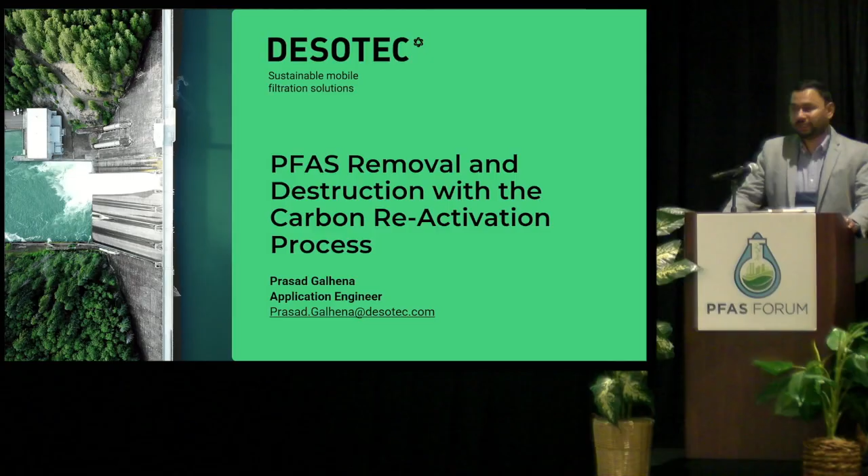My name is Prasad Galhena, and I'm with DESOTEC, and we are the largest activated carbon mobile filtration company in the world. We've been in the industry for 30 years, and I'm the applications engineer working with our commercial team.

So today's goal is to give you a clear understanding, because everybody talks about activated carbon adsorption, resins, and all these technologies. But as you know, this is a phase separation. You have something in air or liquid phase, and you got to take it out. So you use activated carbon, and then nobody talks about destruction. So it's a phase separation, and it's still on the carbon pore structure. So now you have a problem with disposal of activated carbon. So that's what I thought.

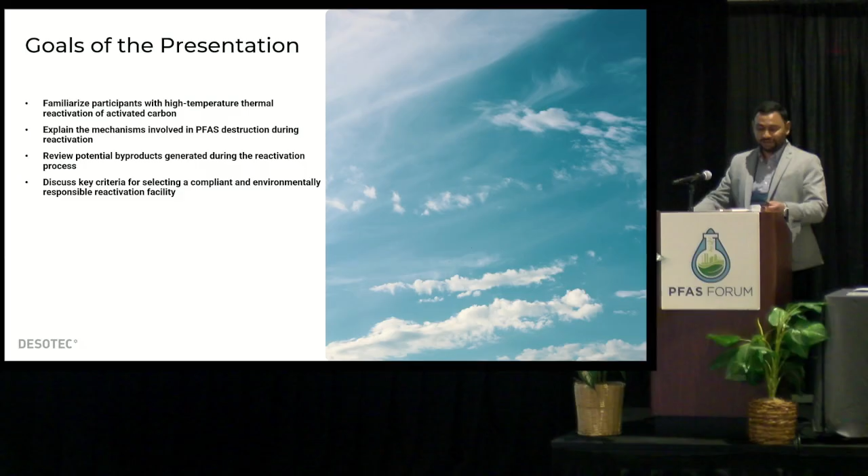I'm going to discuss destruction of activated carbon after remediation treatment. My goal is to give you a clear understanding of high temperature thermal destruction of PFAS, plus the byproducts produced in this process, and also to evaluate, because not every single reactivation facility is EPA compliant. So I'm going to discuss how to evaluate and find the right facility so you can safely dispose of activated carbon.

This is the process: you have saturated carbon, and then it's off-site disposal in a reactivation facility. During this process, during the reactivation process, there's going to be off gas, flue gas, gas emissions, and flue gas salts. Plus reactivated carbon free of PFAS, ready for reuse.

A 1-minute crash course on how activated carbon works. When it comes to PFAS, you can use coal, wood, and coconut shell. These are the three primary raw materials used for manufacturing activated carbon. Coconut shell has a really high micropore structure, ideal for ultra short chain PFAS compounds and VOCs. Whereas coal based and wood based have a combination of meso and macropores, ideal for long chain PFAS compounds.

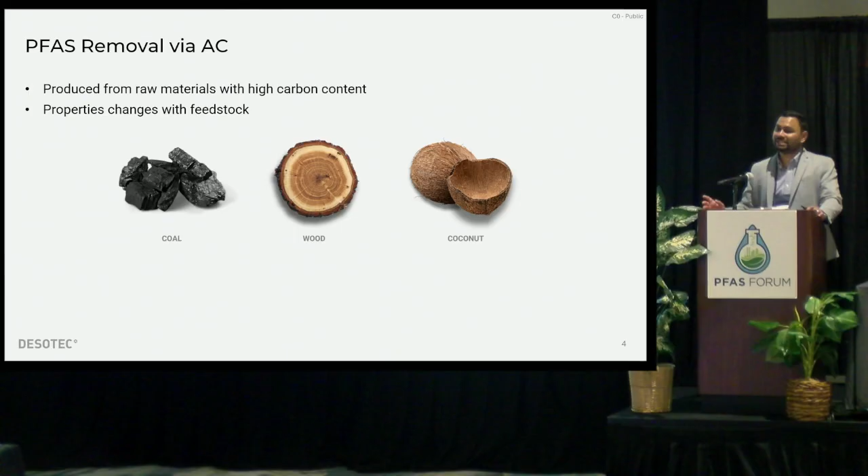Depending on the raw material type and the activated carbon type, the adsorption efficiency varies. So you need to be careful when selecting the right activated carbon type. Not everything is the same.

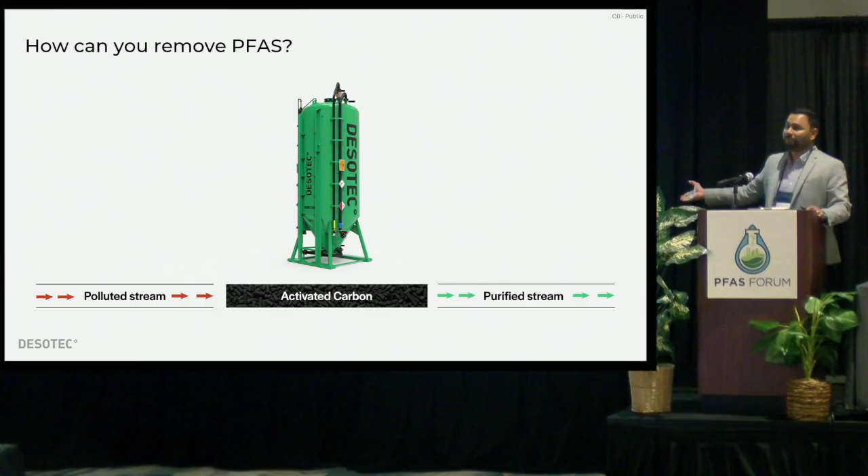This is how the process works. You have the polluted stream, the liquid wastewater or drinking water stream, and then you have the filter filled with activated carbon. The liquid goes through the activated carbon filter, all these PFAS and pollutants get loaded onto the pore structure, and you have a purified stream. That's the basic principle.

PFAS can be completely removed using activated carbon, down to almost non-detect levels, less than 4 parts per trillion. Yes, you can use activated carbon to remove it, as I explained with the micropores, mesopores, and macropores.

So that's the mechanism. The lifetime of the activated carbon filter depends on the type of PFAS and concentration, because activated carbon cannot handle really high concentrations. So you need to check, like most activated carbon manufacturers and suppliers have mathematical models. You can use isotherms and pilot testing to find out if this is feasible.

Then there's presence and concentration of other organic and inorganic matter, like especially TOCs in water. It could be drinking water, like in groundwater, TCE, PCE. Those compounds can compete against PFAS to get into the pore structure. And the type of activated carbon, as I explained, the contact time, and discharge limits matter. Discharge limits, POTW or surface water limits, you need to be careful with that. The contact time is really important.

If you don't provide enough contact time, there's going to be issues and early breakthrough of the filter. So for PFAS, when I design systems, I provide at least 15 minutes of contact time. And if it's industrial wastewater, such as oil and gas systems, chemical plants, or stormwater runoff, I design with 30 minutes to 1 hour contact time.

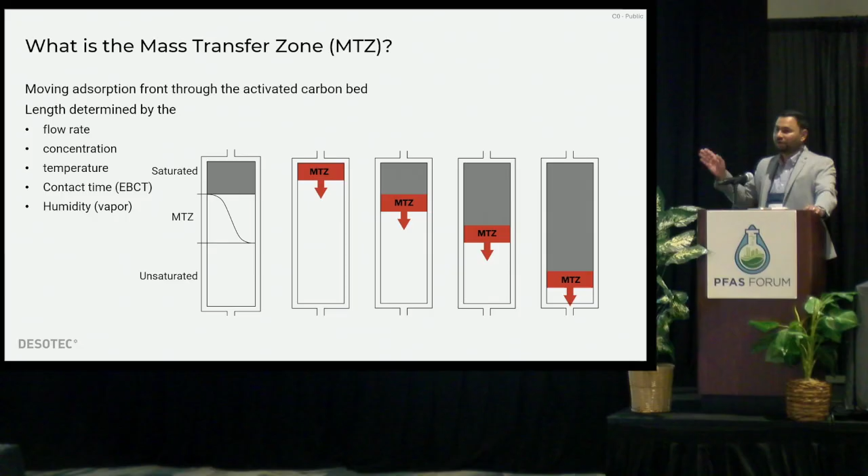Most engineers I've seen think they just need 2 filters with 2,000 pounds of carbon, or 10,000 pounds of carbon. But it's not just activated carbon - you need to design the filter properly with enough contact time in order for adsorption to work. So keep that in mind.

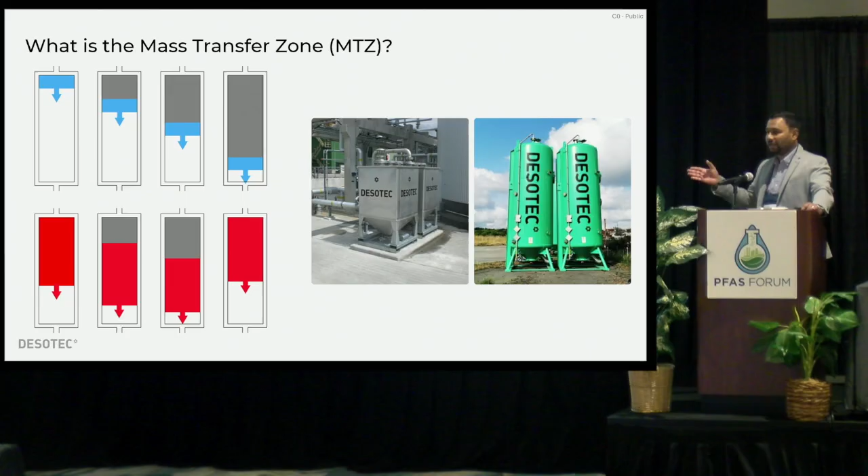This is a comparison of 2 mass transfer zones. The blue one is short and sharp and very efficient, and it moves through the bed which is designed properly, with no channeling or anything. The red one is broader, a larger mass transfer zone, because there isn't enough contact time or enough flow rate, or something like that. This shows that it's not just activated carbon - it's about engineering the system as well.

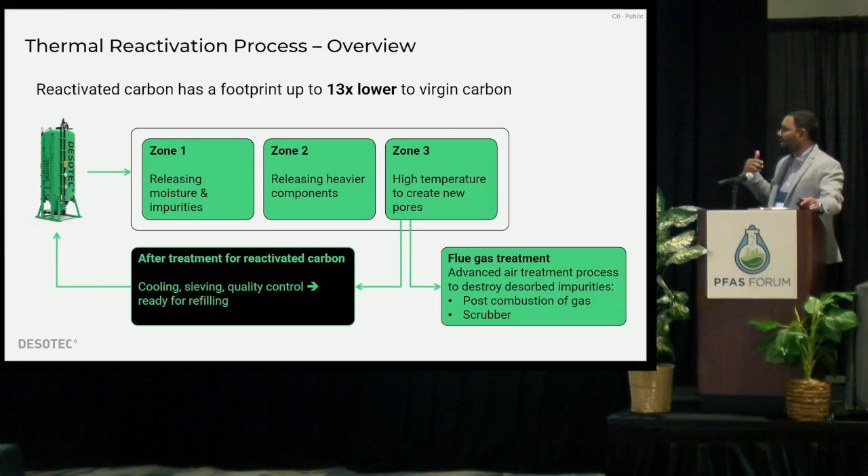The most important thing is reactivated carbon has a footprint up to 13 times lower than virgin carbon. So the customer doesn't have to use virgin carbon every single time. They can reactivate and save some money on carbon filling.

So the recycling, this is how it works. First, at 120 degrees Celsius, drying the saturated activated carbon and volatilizing low boiling point components, around 450 degrees Celsius. Pyrolysis of other organic components up to 600 degrees Celsius, it could be PFAS and things like that. Then steam injection for oxidation up to 950.

When it comes to steam injection, it not only oxidizes certain molecules inside the activated carbon pore structure, it also creates certain new pores. So there's not going to be a big difference between properly reactivated carbon versus virgin carbon. This is why the heat profile is very important.

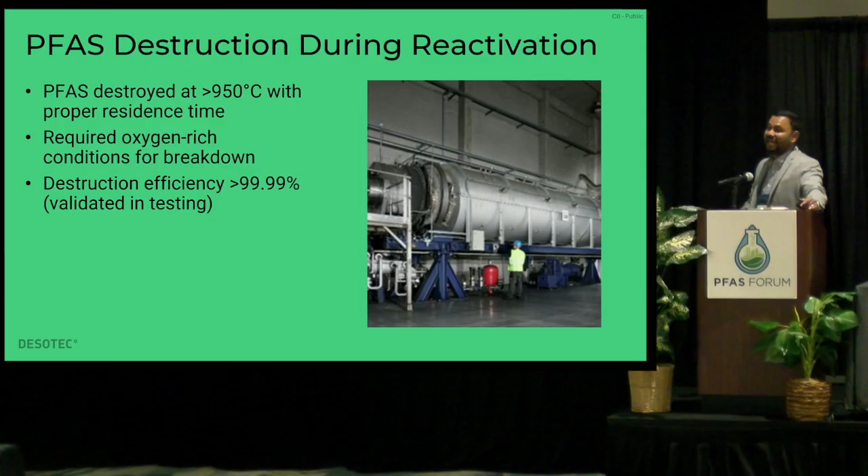The destruction efficiency is the most important thing. It could be more than 99.99% with validated stack testing and destruction testing.

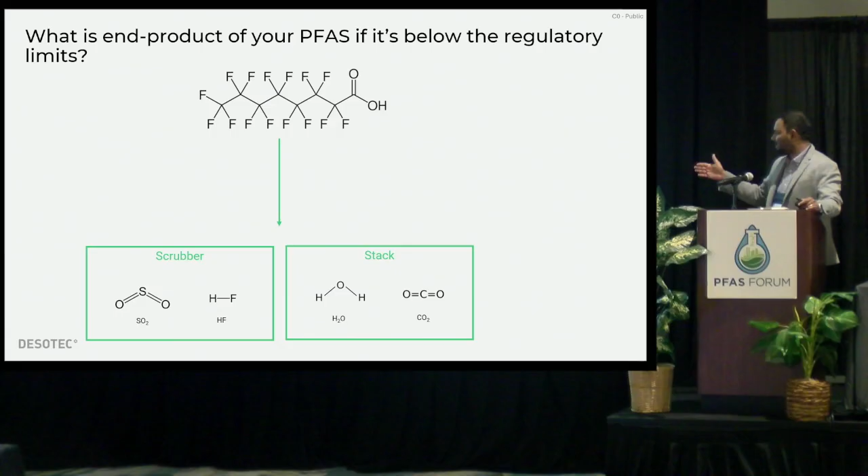The byproducts during reactivation: as I explained, the PFAS is desorbed and then completely destroyed, and that creates, inside the post-treatment flue gas, the scrubber system produces HF and SO2. The scrubber system handles this by injecting sodium hydroxide and caustic to neutralize completely, and then in the stack, there's only H2O and CO2. That's pretty much it.

Emission control and byproducts again, for flue gas treatment you can use thermal oxidizers, and acid gas scrubbers are used. Byproducts include HF, CO2, H2O, and trace inert ash. Laboratory analysis is important because you have to do stack testing and test any trace inert ash or residues to make sure those are free of PFAS.

The reactivated carbon is another important factor. Once the carbon is reactivated, you need to make sure it's free of PFAS residues. You can send samples out, or in-house laboratories can run this to make sure it's free of PFAS.

Selecting a reactivation facility, it's important to read the interim guide on PFAS spent carbon reactivation. Number one, ensure permits to handle PFAS-laden spent activated carbon, whether this is a permitted facility, a RCRA facility, and things like that. I've seen many things in the industry over the last 15, 16 years, where a supplier says they can run PFAS, but actually they're running around 1,100 to 1,200 Fahrenheit, so these PFAS are just releasing into the environment, mainly because there is no permit for that kiln facility.

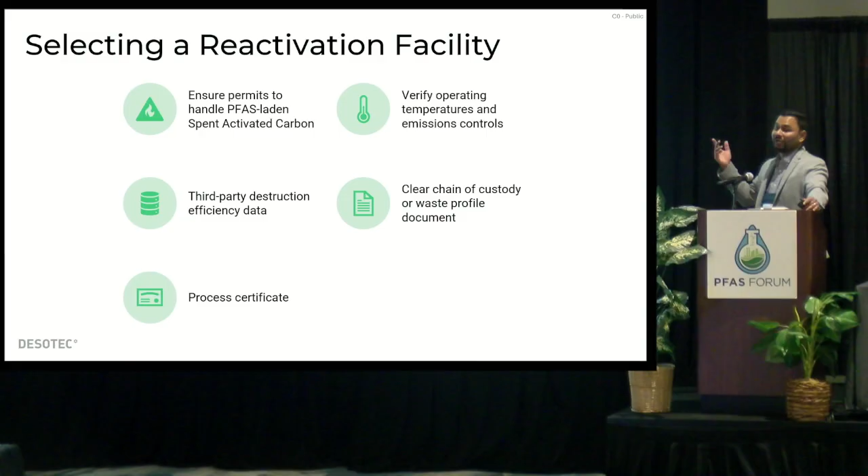You can do a site walk, go to the facility and make sure you do an audit of that facility for reactivation. And there should be a clear chain of custody and waste profile document, since you're transferring your waste into another facility.

Life cycle benefits of reactivated carbon: it reduces demand for virgin activated carbon. As you know, over the last few years there was really high demand for virgin carbon, and prices are going high, especially due to tariffs, especially carbon coming from other countries getting 30%, 40% tariffs.

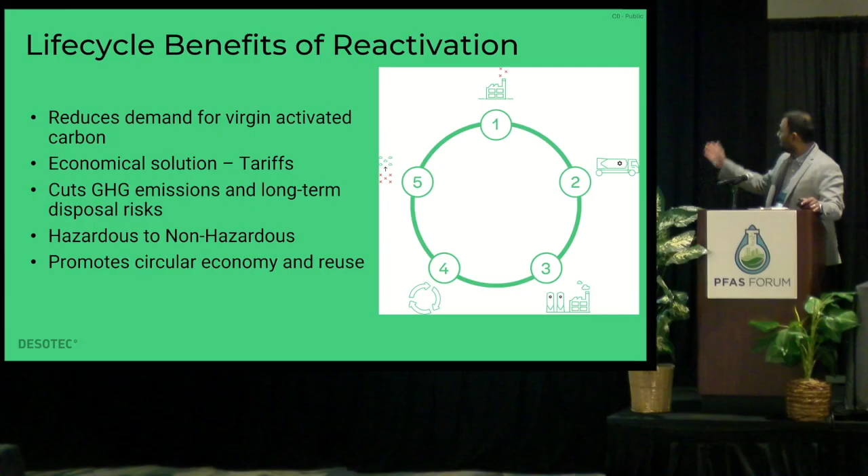And it cuts greenhouse gas emissions and long-term disposal risk. Each time you reactivate, you don't have to send it to a landfill, and you can completely destroy all the PFAS and use that carbon back. Hazardous to non-hazardous - so hazardous carbon filled with TCE, PCE, PFAS, and turn that into a non-hazardous compound that you can reuse. Especially at DESOTEC, we call it circular economy - you use it again and again, at least 5-6 times before it's completely exhausted.

Limitations and considerations: not all spent carbon is suitable for reactivation because facilities might have restrictions, especially the scrubber system or caustic pump, and it could be the maximum PFAS limit. So before you send out your activated carbon laden with PFAS, make sure the facility can handle that. There has to be documentation, a permit, or destruction data showing the maximum PFAS level that we can handle.

Short chain PFAS may require enhanced controls. We have different types of activated carbon for that - for short chain and ultra short chain compounds, you can use coconut shell. When I design systems, I use maybe 2 or 3 carbon types, maybe 2 different stages, to remove TOCs and short chain PFAS, and then long chain.

Reactivated carbon must be tested post process - of course it requires lab analysis to make sure it's free of PFAS. There's a limited number of reactivation facilities in the US, so the logistics can be kind of complicated, so you need to make sure you cover that.

I think that's it - this is DESOTEC. Thank you so much, appreciate it.

So next, we will bring up Phil Farina from Clear Creek Systems, and he's going to talk about PFAS treatment for rural water treatment systems. And I want those extra 3 minutes. Nope, we're not going to give them to you.

Good morning, everyone. My name is Phil Farina, and I'm with Clear Creek Systems. The first thing I want to do is ask a question: how many people here either represent a rural water community or work with a rural water community that has a PFAS problem? Throw your hands up.

So I got one member of the audience. Who cares? Okay, that's good. We all can.

What I'm going to be talking about today is a roadmap for rural communities. At the end of the day, we're going to try to provide practical guidance - a roadmap. These are things that a rural community can do step by step. There's a lot of noise in this industry, a lot of smoke and mirrors, and a lot of fact, but it's very difficult sometimes to separate fact from fiction. So our goal is to help you understand by following a specific series of steps from beginning to end, giving you all the things you need to do in order to develop a treatment system, because that's the ultimate goal - the development of a treatment system.

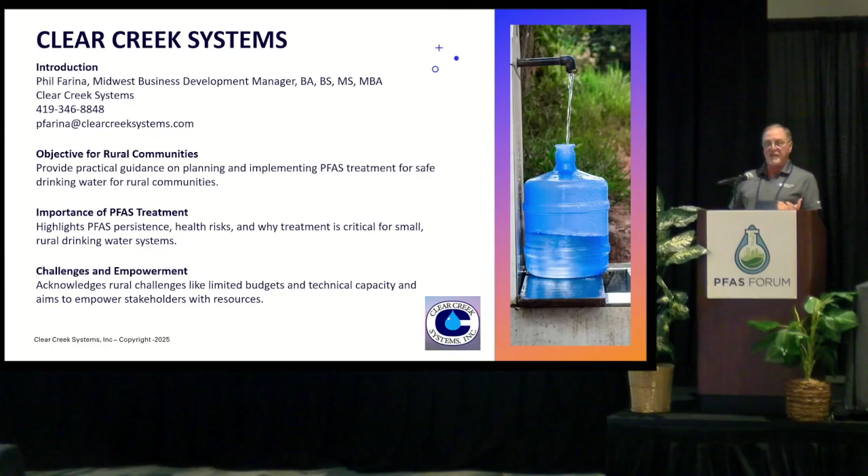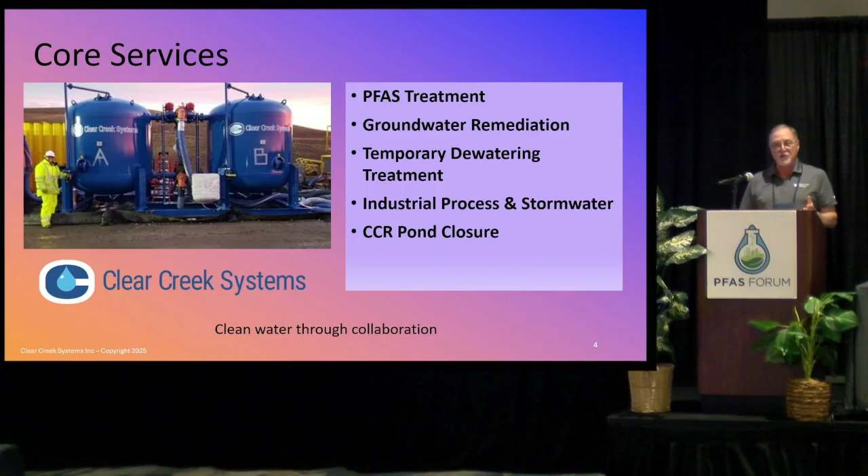And then we're going to talk a little bit about the challenges facing smaller rural communities. So we're going to go from contamination to cleanup and provide a course to get from point A to point B. Paid commercial announcement: Clear Creek Systems is a PFAS treatment technology agnostic company. We treat all kinds of water, and we've utilized 35 years of experience in developing water treatment technology that allows us to bring this concept to the table. This is not something we developed in the last 2 years - we've been utilizing all of our knowledge and technology to help develop this roadmap to treatment.

So, per and polyfluoroalkyl substances - our best friend, PFAS. We all know it's the forever chemical, and there's a lot of disputes about what that really means. At the end of the day, it means the following: most things break down in the environment.

PFAS doesn't break down because of the quality of the carbon-fluorine bond. That bond is non-naturally occurring, and because of that it's incredibly strong. Microbiology cannot break it down because it costs too much energy, as if you were eating celery for the rest of your life - the nutritional value isn't sufficient for microbes to survive, so they prefer other carbon sources. It's as simple as that. I'm a microbiologist by training, and believe me, I wish my little babies could do it. They can't.

It is toxic. What does toxic mean? Toxic means it has an impact on the biological system itself. It does not mean it causes cancer. There is not a single peer-reviewed journal entry that indicates that PFAS in any of its forms causes anything. There are correlations, but not causation, and that is incredibly important to understand.

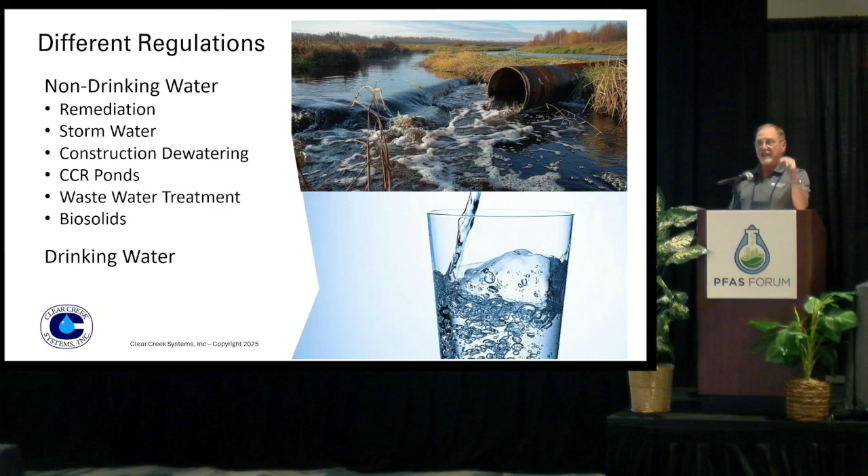9 states in the United States have eliminated the utilization of biosolids as a land application product because of PFAS in it. We're building mountains of biosolids.

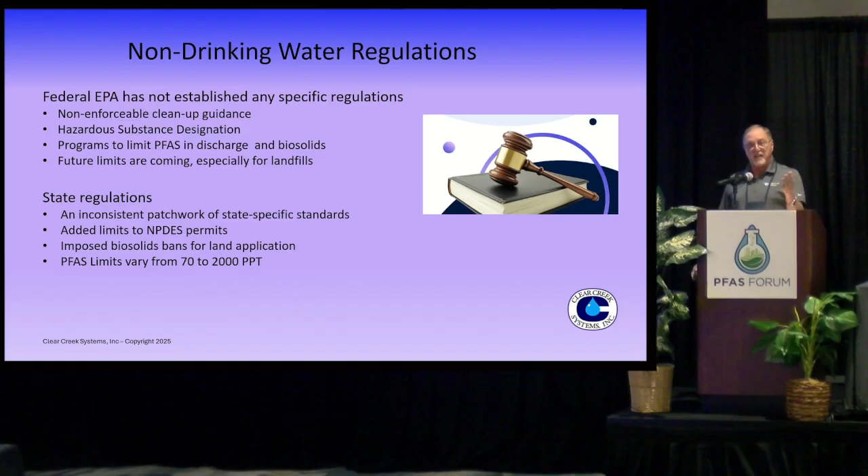Non-drinking water regulations, they have not established anything. The states have primacy on that, so they're working down that path by the state. Some states have levels of like 70 parts per trillion for non-drinking water. Some states have levels of 2,000. So if you are in a state that you're working on a wastewater treatment facility, please contact your state regulator and find out what their specific regulation is.

What's next? The US EPA is going after landfills, POTWs, pulp and paper. All that wonderful shiny paper in front of you, that's got PFAS in it. All the inks that you're dealing with, that's got PFAS in it. PFAS is going to be added to new air permits. We're not having enough trouble handling it in water. Let's just really complicate it and start handling it in air.

It is not a hazardous waste. It is a hazardous substance. That's hugely different, and again, I can spend hours telling you the differential between that. And some of these Superfund sites, those poor guys that got their nice little closure document, may have to reopen it if they're leaking PFAS out of that facility.

Federal drinking water standards. Everyone's read this: 284 pages, April the 10th. Everyone read it? Yeah, I did. The standards are PFAS at 4 parts per trillion for PFOA, PFOS. You have the 10 parts per trillion for Gen X and all of these others, and the compliance deadline of 2029. I have had people come up to me on a number of occasions and say the compliance deadline is not 2029, it's 2031. How many believe it's 2031?

Excellent. January 6, 2026, the U.S. federal courts threw out the request for vacate. The reason they threw out the request for vacate is predominantly because in order to change the law, it's a legislative change, not a judiciary change, and because of that, the EPA backed off. It is 2029 that we need to be in compliance with these drinking water standards.

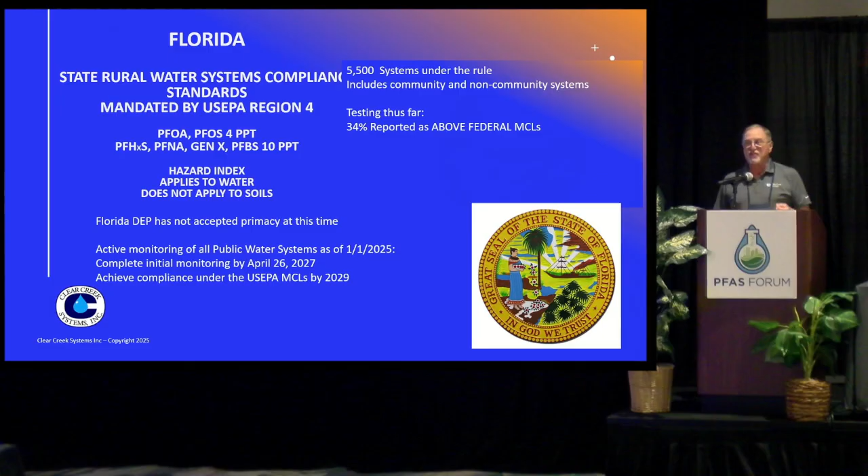Rural site challenges. One of the things about rural facilities is they tend to be small, so you don't have a lot of people to deal with, and you don't have a lot of revenue coming in on the water stream. So revenue is a big factor for rural communities. Large municipalities have large numbers of people. They can charge 2 pennies or a penny to treat, and they have lots of revenue coming in. If you've got 2,500 people, you can't raise the price enough to cover it. So that's one of the important factors: very small populations and very limited staff. Most of these smaller facilities have 1 or 2 guys, and some of them are not even operators. They're just Joe Farmer who comes in on Tuesday and checks the system.

So compliance is going to be stepwise at that point. Aging infrastructure: a lot of these small facilities we see are old. They're basically a well in the ground, a pump, maybe a filtration system - 99% of the time no - and sometimes a disinfection system. That's it. That's the whole thing these small rural communities are dealing with at this point in time. Most of their source water is groundwater. Groundwater is different from surface water when it comes to contaminants and treatment, and it's really important to understand, when we get to the map, the difference between groundwater and surface water.

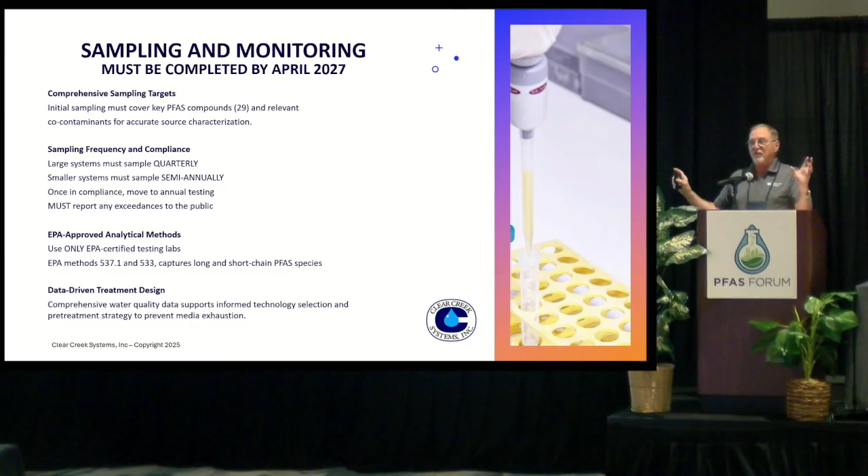EPA approved analytical methods. There's lots of methods out there coming. There's one that can tell you down to 1.5 parts per trillion for $100 in 15 minutes. But right now, today, where we sit, US EPA methods are 537.1 and 533. That's for drinking water, that's what you need to be utilizing. 1633 is for something completely different, it's not for drinking water.

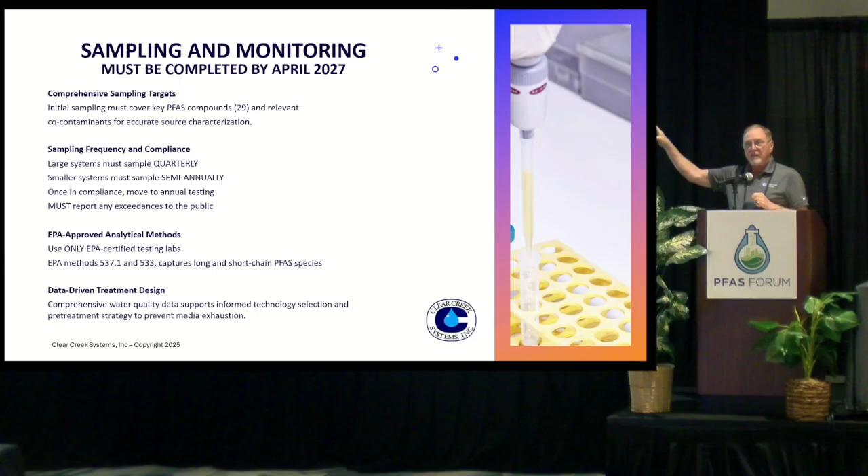Make sure that you are utilizing a certified testing lab. It's very important that the labs are certified. This is the analytical that you need to perform. At a very minimum, all of those under the UCMR 5 have to be tested for.

And lithium. Why lithium? Because we're throwing away a boatload of batteries. What do you think the EPA wants to know about lithium in batteries for? It's because down the road, what do you think the next thing they're going to be regulating is? It's lithium. So you need to know that going in.

You also need to know all of these other things. When I show you the rest of the map, you'll understand that all of these things may impact your water treatment technology. If you have high nitrates, sulfates, or TSS, it's going to impact your treatment choice. So what are those treatment technologies?

Right now there are 2 major classes of treatment technologies: media systems and non-media systems. Media systems include our friend granular activated carbon. I am a firm believer in bituminous, virgin carbon. It has the best application for PFAS, it has the right pore size, etc. You can use coconut carbon too, it may not last as long, and you may not get the same net result, but at the end of the day that is one of the materials to look at.

The other option is ion exchange. Ion exchange has a different mechanism. It's much faster, you may use less media. It can be a few dollars more expensive, but over the life of the system it may be less costly.

When you're calculating how much this is going to cost, do not look at the instantaneous cost, but look at the 3-year total cost. I'll show you the math in a minute. What you're going to do is look at the total cost, divide that into the number of gallons of water that you treated over those 3 years, and you will get a price per gallon. That is a critical value that you need to know.

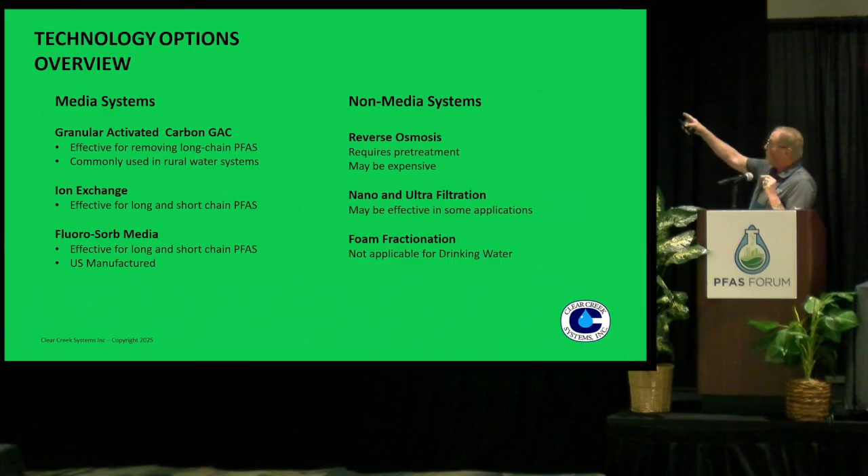Fluoro-Sorb is another media application. For non-media, we have reverse osmosis. We all know the problem with reverse osmosis: it takes all the salt out of the water, it changes the taste dramatically, you have to put salts back in to make the water taste right, and you lose 25% of your water. Not a real great plan for drinking water, but it can be accomplished.

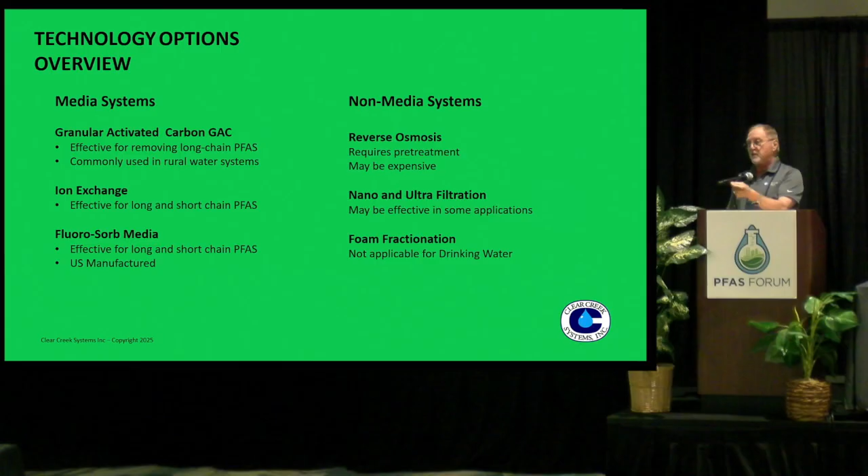Nano and ultrafiltration, Florida loves this. It's a really good technology, it does work really well. And then foam fractionation, which is not compliant for drinking water, so I put that up there for anybody who's got a landfill or wastewater treatment facility. Foam fractionation may be something that you can do.

Treatment technologies: when you're looking at your system, before you design your treatment technology, you want to have that information I just told you about when it comes to the analytical. It's really important to have that analytical before you start looking at treatment technologies. So you want to know what your PFAS profile is. What do I have? Long chain, short chains, lots, little, contaminations, etc. You want to know that before you get going. You also want cost and scale considerations. You don't want to put in a massive system for a small amount of treatment.

So it's really important to be working collaboratively with someone, not just give me your lowest price. How many would agree with this statement: the lowest price on the bid is not necessarily the lowest cost of what I pay at the end? Guys, we have to get sensible on this kind of thing.

Technology preferences should be determined by the contamination you have, not by media preference. If all you have are short chains, DESOTEC would agree that carbon is not necessarily the best media to go to, because it's not the best media for short chains. So again, make your decision based on data, not on preferences.

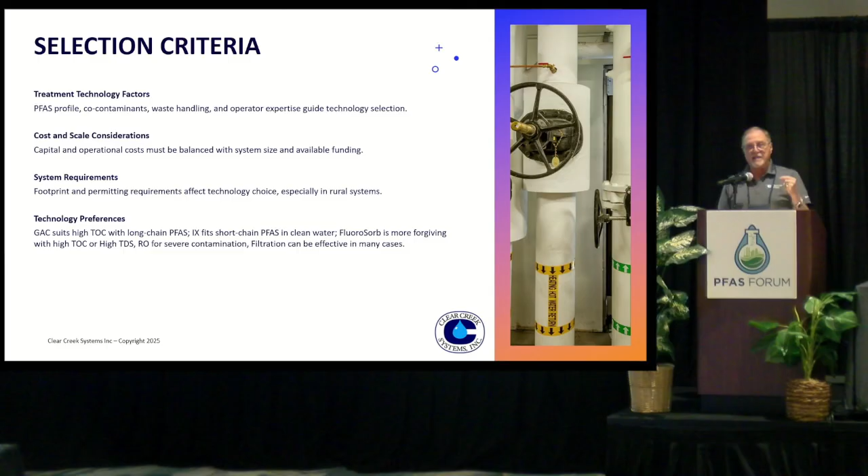This is a very busy chart, but what it basically says is there is a known profile for each of the different methods and medias you want to utilize. I usually spend 15 minutes just on this slide to help you understand all of your parameters, but suffice it to say, there is enough data to help you understand which methodology you should be applying to your treatment system.

What are the tools? Everybody needs to understand that you're not alone. There are tools that will help you define your treatment system. The first set of tools is the Rapid Small Scale Column Test, which everybody calls the RSSCT, the correct terminology for it.

What the RSSCT does is allow you to look at multiple medias to help determine which media will exhaust first. People want me to say it will tell them how many weeks, months, years or decades their media will last. It doesn't. In a line-by-line comparison of GAC, FluoroSorb, ion exchange, whatever medias you want to have, it will tell you which media will exhaust first, second, and third. It will not tell you how long it lasts.

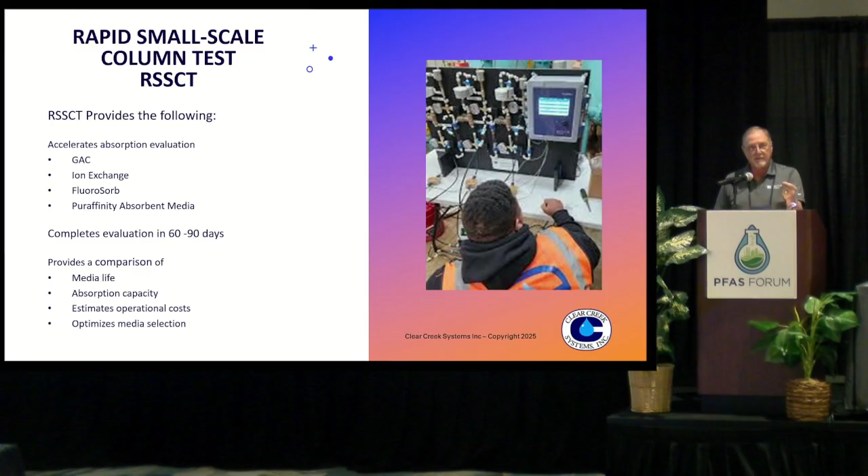There is a mathematical equation called the Thomas equation, which is incredibly complicated, that will utilize that information and give you a number. It's a mathematical number, not a guarantee or a warranty. But this will help you define what treatment you can look at for your system.

Your other tool is the pilot study. The pilot study can take upwards of a year because you have to go through the four seasons. With an RSSCT you really don't, because all you're trying to figure out is how long this media will last against another media. It's qualitative, not quantitative, whereas a pilot study could be quantitative, actually showing over a period of time how long a media is going to last.

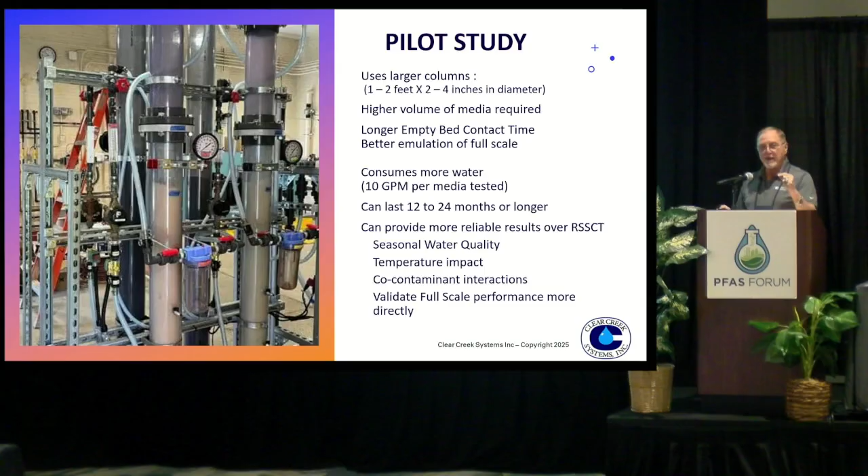But guess what? We don't have the time anymore to do that. We've run out of time because a lot of people didn't do it earlier. Okay, so there are 4 steps in defining your treatment system. I apologize for the speed of this, but I only had 25 minutes.

First step: consider the water source and what it's going to be used for. If it's a drinking water source, groundwater, or surface water, those are different waters. If it's a wastewater source, or stormwater, you want to know that before you start going down a path of determining what your outcome is going to be.

You also want to look at the water analysis. Remember that long chart? That is critical. You need to be running that analysis. By having those two data points, you're halfway to a choice of what you're going to do.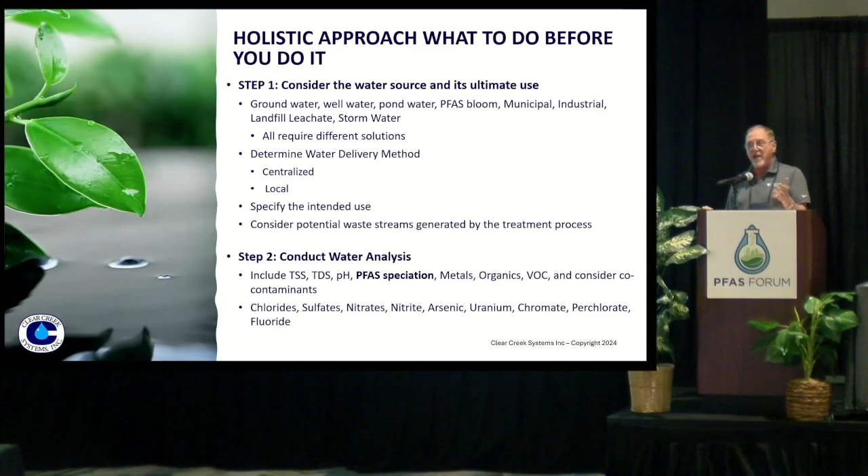The third data point is understanding the treatment levels. If you're drinking water, we know what those are, 4 and 4. If you're wastewater, your state will have a different set of applications. So we're not just talking about drinking water today, we're really talking about water treatment. If you follow this step for all sources of water, you will get to a treatment system that works.

Step 4, your key consideration, is your installation. Is your installation permanent or temporary? Everything is based on flow rate. If you're using a media, reverse osmosis, or even ultrafiltration, flow rate will determine things like size, footprint, cost, and media volumes. It's incredibly important to know your flow rate.

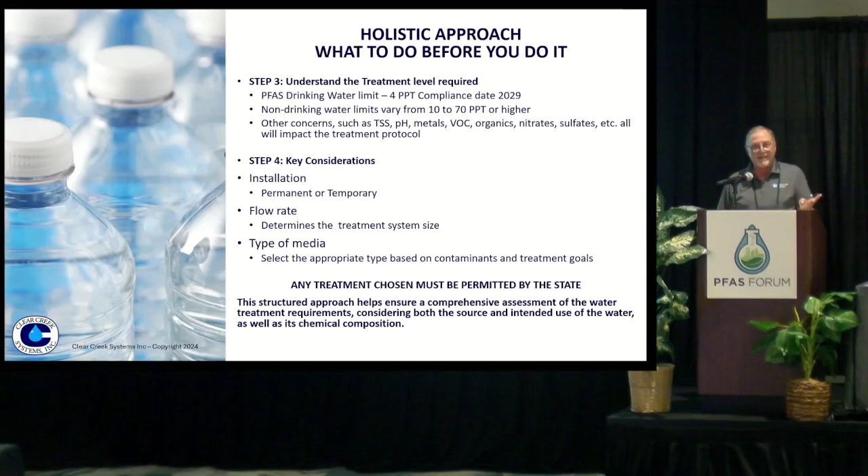What happens frequently is someone says, oh, on Tuesday we're at 1,000 gallons a minute, but every other day we're at 100 gallons a minute. I'm not going to tell you to build a 1,000 gallon a minute system, because if you do, it's going to cost you hundreds of percent more than you need to spend — you need to balance that out. So collaboratively work with people. Please stop the give-me-your-best-price scenario, because you're never going to get there with that, honestly.

Cost of treatment, this is the money slide right here. On a 1 million gallon system, 700 gallons a minute, you've got a cost of about $1.8 million for equipment and installation, not including a building. Your annual cost to operate that equipment, including media changeout, is about $145,000. In 3 years, you add those all together, so it's 145 times 3 plus 1.8 million.

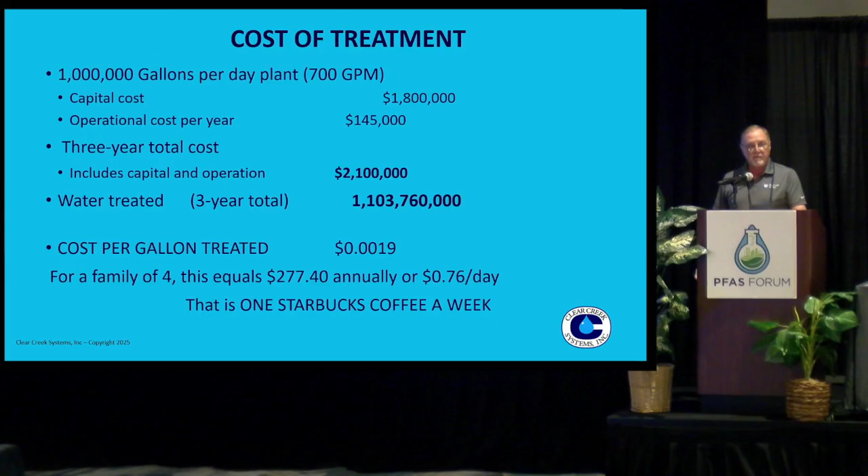You get $2,100,000. That is a lot of money for a small community, I get it. But at the end of the day, you're also treating 1 billion gallons of water at the end of 3 years. You divide those two numbers, you get 0.0019. That's doable. There are ways to get to that point. It is very, very doable.

A word or two about destruction. We're not there yet, lots of things going on. I can't spend any more time on destruction.

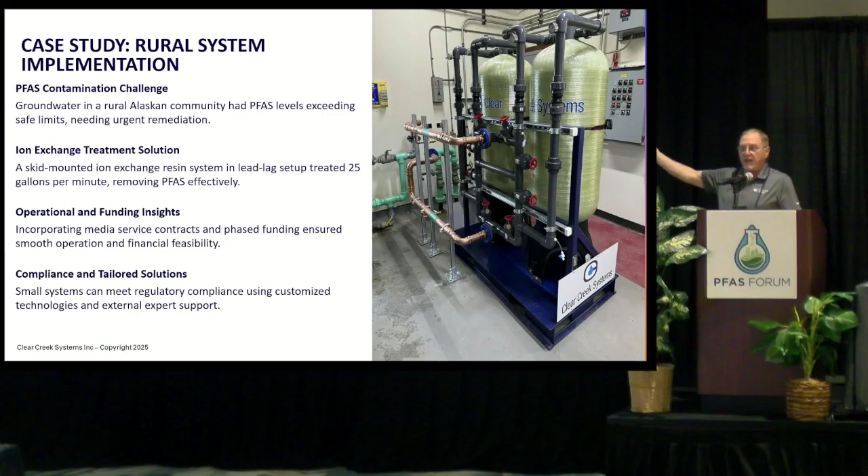What do systems look like? Real quick, I've got 4 slides. This is a treatment system that can go up to 50 gallons a minute. It's under 100 grand, completely installed, operational, and ready to go. Comes to the site, all you do is plug it in. The 2 gold pipes, you plug in the top one, you plug in the bottom one, you're operating.

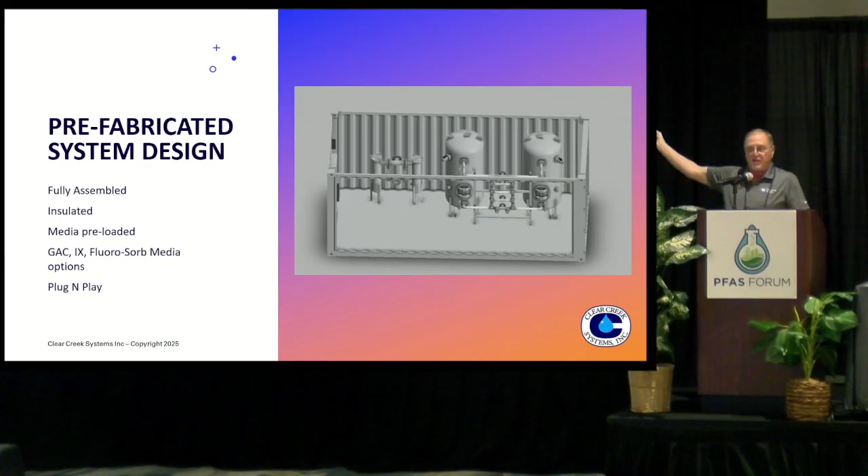Drinking water, this is a 500 gallon a minute treatment system, $165,000. We can put them in Conex boxes, we can put them in sheds, we can put them in anything that you want to put them in.

So at the end of the day, last slide, I promise. Water treatment is a science, not a commodity. Science does not lend itself to the lowest bid. I've said that 5 times. The lowest bid solution is frequently not the lowest cost. When developing a system, you should focus on understanding the water, collaboration, agree on clear, measurable, prioritized outcomes, and consider the life cycle costs over the initial costs.

If you need to get a hold of me, that's where I am.

It's always hard to stand up here, especially for people that give talks all the time, because we'll take talks that are 7 hours and try and put them into a half an hour, and you feel like you're speed dating.

A couple of things you said, before we go on to the next speaker, I want to reiterate because it's really important. Everything that you see out in the news, there was one that just came out the other day that started talking about the EPA pulling back those 4, they're going to create a rule to pull back those 4 additional PFAS and the hazard index. Understand that that's already codified in the Safe Drinking Water statute. So in order for them to pull that back, the court system's actually going to have to find a procedural issue with that to pull it back. Because otherwise it falls under the anti-backsliding rule, and they've already lost that in court twice. So don't rule out those PFAS yet, because you're going to see them eventually, and there's already people in Congress trying to codify it congressionally, so it can't ever be pulled back.

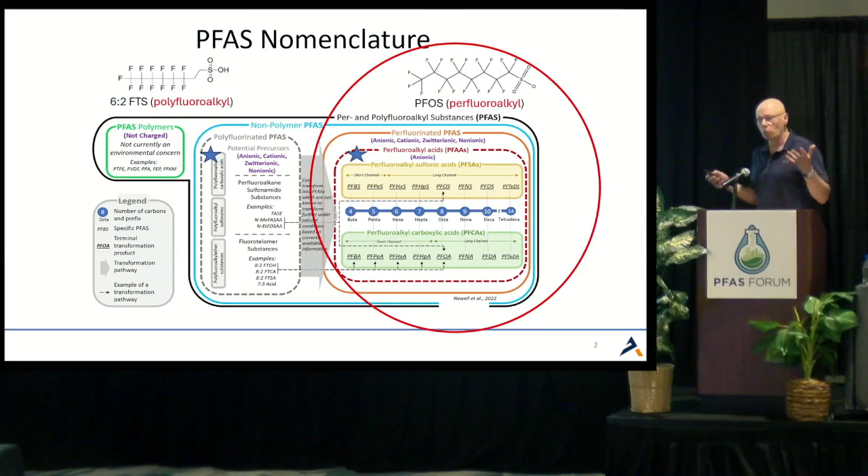I'm going to start off talking about our perfluorinated compounds, those that have fully fluorinated backbones. At the end of this, I'll talk a little bit about precursors and what's going on with precursors. These are our PFSAs and PFCAs, perfluorosulfonic and perfluorocarboxylic acids—the compounds that are regulated, so these are the ones we're concerned about. But first, we're going to do a little biodegradation primer.

Why are bacteria degrading these things we put in the environment in the first place? I'm sure many of you as consultants and regulators have looked at various compounds like BTEX. What organisms do with many of these compounds is use them as carbon sources and electron donors, just like when we eat a hamburger. Same thing, right? They form biomass and energy. They don't get big and fat, they divide, they make more of themselves. Thank God we can't do that.

And as electron acceptors, in this case, they're using oxygen. So this is why when you go to a BTEX site or a PAH site, a lot of times you have to do biosparging or get oxygen into the ground, because that's what they're missing. The other thing we've learned over 30 or 40 years is that bacteria can use things like chlorinated solvents as an electron acceptor.

So in this case, what we do is put carbon in the ground. This is where we've used things like emulsified oils or other substrates—you see all these vendors have different carbon substrates. We add the carbon to the ground, there are bacteria there that will use that carbon, you create anaerobic conditions, and they can use compounds as electron acceptors.

There's also some organisms, for things like explosives and nitrosamines, that need other nutrients: nitrogen, phosphorus, sulfur. And there are actually some organisms that use polyfluorinated PFAS as a sulfur source. So there is some precedent here for some of the PFAS. And then finally, there's reactions called co-metabolic.

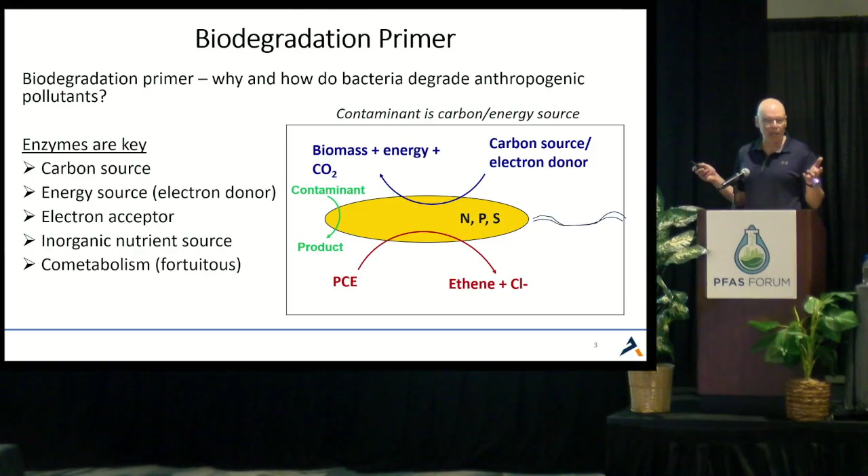I see James Mills sitting there—he's done some of his PhD work on this type of thing. There are organisms that have these broad specificity enzymes, and they can degrade lots of different contaminants, but they gain nothing from the process. That's called co-metabolism. All right, so with that primer, let's talk about chlorinated versus fluorinated organics.

We know we have a long history now with chlorinated solvents. There's this organism called Dehalococcoides, another one called Dehalogenimonas. They use acetate as a carbon source and hydrogen, and then they dechlorinate things like PCE and TCE, ultimately through to ethene. We understand now the genes involved in this process, we understand the organisms—there's hundreds, probably thousands of papers on this, and I hope many of you have applied this at chlorinated solvent sites over the past generation or two now.

Okay, why did this occur? Well, chlorinated compounds have ancient origin. This is something I've come to learn over time—that there are thousands of chlorinated organics in nature. We don't think very much about this. And there are enzymes that create these.

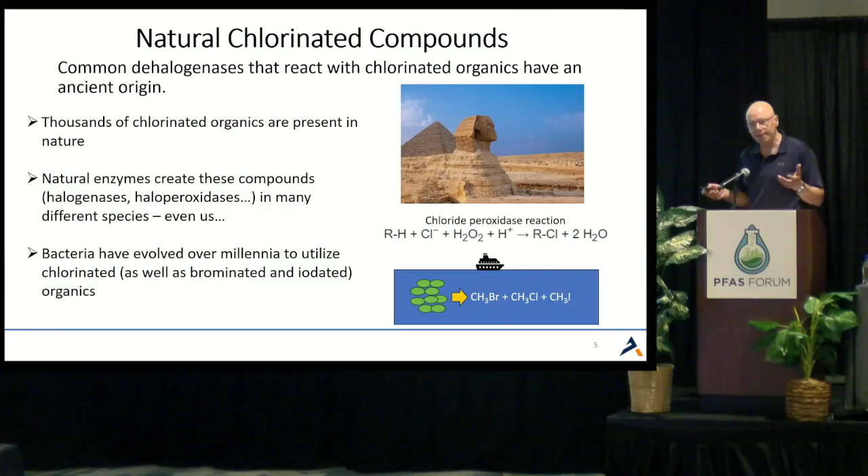So what's happened is over the millennia, bacteria have evolved to use these compounds, and then we come along—a very short time ago compared to how long bacteria have been here—and we start making things like PCBs and PCE and TCE. Well, guess what? Bacteria already have a framework because they're used to a lot of these chlorinated compounds being in nature.

So an organism like Dehalococcoides that we think, wow, it just suddenly appeared to degrade our chlorinated compounds, well, it didn't. In nature there are already these compounds, and this organism probably had some natural substrates, and we just made its life a whole lot better by putting these types of compounds in the environment.

All right, so let's take a look at fluorinated compounds. There are natural fluorinated compounds, but not a lot of them. Fluorine is the 13th most common element on the planet, and yet there are only a handful of natural fluorinated materials. So they're very rare in nature, and the other thing is they're usually monofluorinated or occasionally difluorinated. What you don't see in nature are the types of compounds that we made that have this long backbone with completely fluorinated carbons.

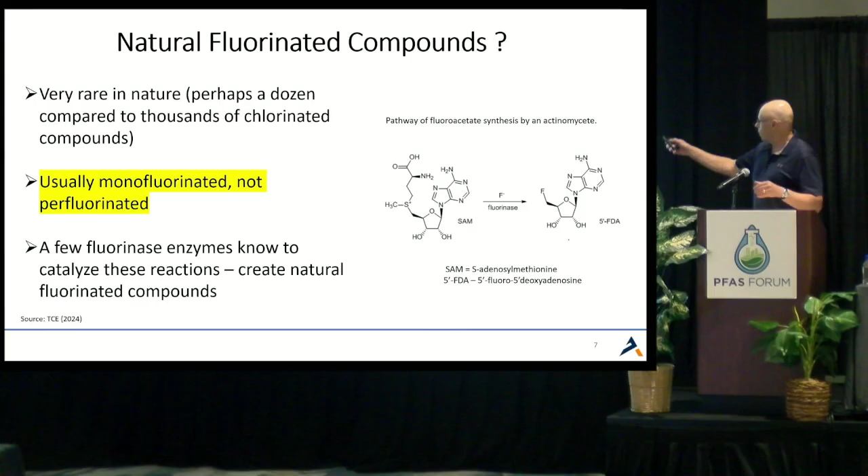That's a very different animal. So here's just one example, here are some other examples, and what you notice about all these different natural fluorinated compounds is that there's typically one fluorine. One of these that's very interesting is fluoroacetate. Now, fluoroacetate is natural. It gets taken up in certain plants, and it's one of the common causes of large kills of cattle in places like Africa or Australia, because if they get grazing on the wrong plants, those that hyperaccumulate fluoroacetate, it'll kill them.

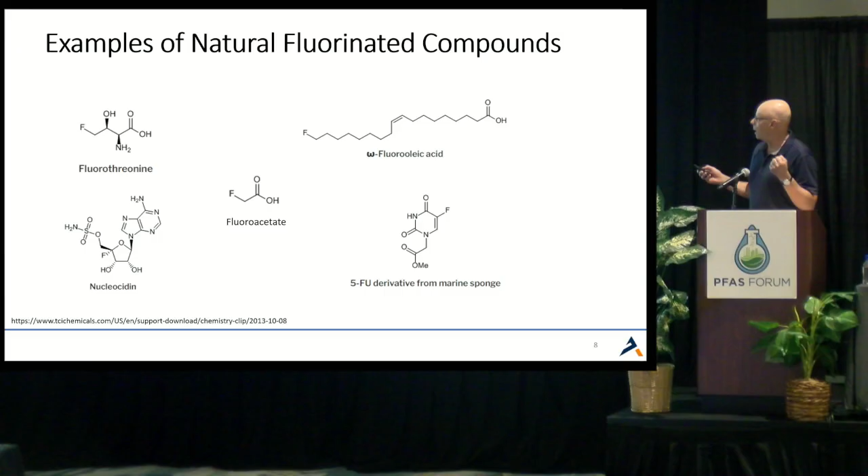And I had the fortune to go to New Zealand this year, and was walking along in New Zealand. They're very particular about this, they have possums that have now invaded New Zealand and some other small mammals. And you know what they use to kill those? They use baits of fluoroacetate. And they will show you, in certain areas where they've used these. So a little aside there.

And people always say, bacteria can't defluorinate a compound. And that's also not true. Bacteria can defluorinate compounds. We've known this for a long time. The first enzyme that could do that was discovered in 1965. So there are natural defluorinating enzymes.

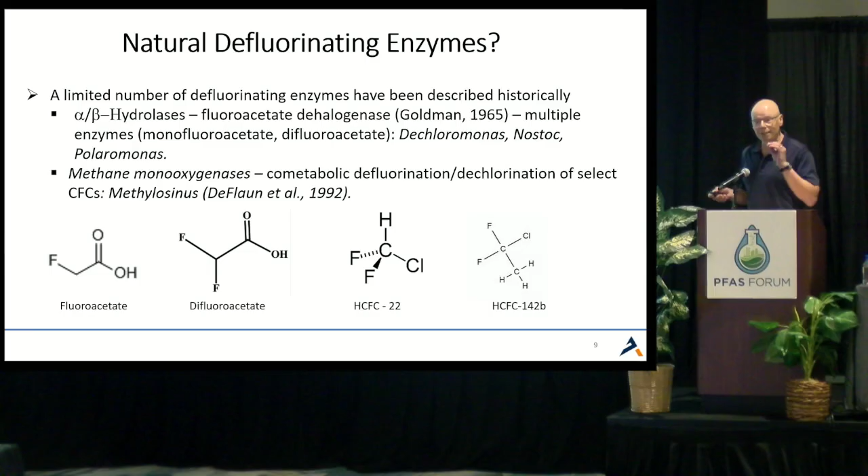But again, looking at monofluorinated compounds, remember chlorofluorocarbons, that was our other fluorinated compounds that we've had big problems with in the past 50 years or so. There were papers in the early 90s showing bacteria could defluorinate some chlorofluorocarbons. So that's possible. That's a super strong bond, yes, but bacteria can defluorinate that, again, when you have a monofluorinated compound. The problem is we come along with these, starting in 1947, with this long fluorinated backbone. Bacteria do not have basically the infrastructure to deal with that. So we've created something new that then again now becomes very persistent.

So we heard a little bit about thermodynamics yesterday. The next question becomes, in nature, if you can gain energy from something, then generally organisms will find a way to do that. So when we look at Dehalococcoides, it can oxidize hydrogen and reduce PCE. And for those of you who are engineers, you understand this very well, but then you get a positive energy gain, or what's called a negative delta G. So you can combine these reactions. You don't need a microorganism to do this, a reduction reaction, an oxidation reaction, and you can see if there's an energy yield from that reaction.

So if I make up an organism, we'll call it Difluorococcus. Is it possible to do the same thing with these types of compounds? So can you take PFOA, for instance, defluorinate it to octane and fluoride, and have there be an energy yield?

So if we take a look at this electron tower, this is something where you look at reduction potentials of different compounds. At the top, we have our really good electron acceptors, and at the bottom, we have our really good electron donors. So we use oxygen as an electron acceptor, which is great because it's really one of the best there is. As you run down that line, these electron acceptors become less and less positive, so you can gain less energy from a reaction with those. But if you look here at TCE, for the reaction from PCE to TCE, that's a pretty good electron acceptor. DCE to vinyl chloride is a pretty good electron acceptor.

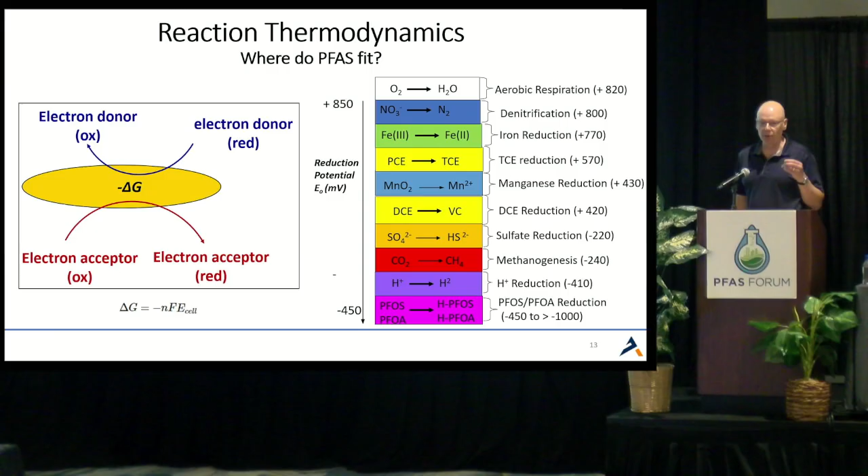So where do some of these fluorinated compounds fall on this chart? The fact is, at least with the fully fluorinated compounds, they fall all the way at the bottom. So it's almost impossible for a bacterium to couple the oxidation of some common molecule and reduce one of these compounds. There's just not an energy yield to do that. Well, it's not impossible for it to do it if it puts energy in.

It's impossible to do it and gain energy from the process. You cannot grow by those reactions. Okay, more bad news: fluoride is toxic. There's no use within a bacterium or within us for fluoride for the most part. So if an organism takes in fluoride, and a lot of them do, you have to have a specific transporter to remove that fluoride. Okay, so let's switch to the other side now.

So is there any hope? Is there any hope in the future for biodegradation and bioremediation? I would say that if we were having this talk in 1980, 1979, we were starting to deal with chlorinated compounds, and some guy would be standing up here saying there's no hope for biodegradation of chlorinated compounds. You can go back in the literature and you will see that, actually, if you go back to those eras. So is there any hope for this?

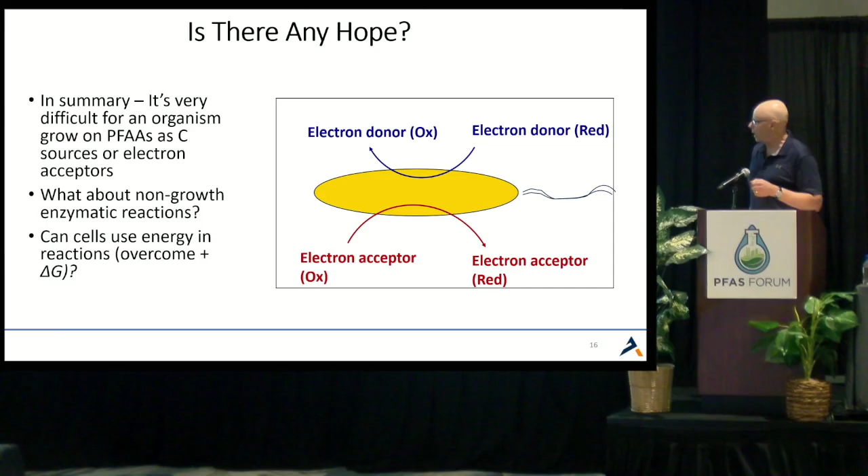Okay, so I've just told you it's very hard for an organism to grow on PFAS, so what about a couple of other things? What about non-growth reactions? I talked about co-metabolic reactions, so is there some way that organisms or enzymes can break these things down without energy yield? Or can cells potentially use some energy in the process to break these down?

So one example of this where cells use a lot of energy is nitrogen fixation. Nitrogen is really valuable for bacteria, for us, and most of us can't use nitrogen from the air. The air is 70-some-odd percent nitrogen, but you can't use it. So some bacteria have evolved enzymes where they put in a ton of energy. These are cyanobacteria, rhizobium, bacteria that grow in association with plant roots. They put in a ton of energy and actually fix nitrogen down to ammonia.

And this is really, really important. In fact, if you go back before a couple of Germans named Haber and Bosch figured out how to do this chemically, natural nitrate and natural ammonia were very, very rare commodities, and we were importing materials for fertilizers, et cetera, from places like Chile where there's a lot of natural nitrate, because we couldn't make things like ammonia very readily.

Okay, so as I go into some of these studies about PFAS biodegradation, I'm going to give you first a cautionary note. A great man named Carl Sagan said, extraordinary claims require extraordinary evidence. So you're going to start seeing claims of biodegradation of these materials, and there's a number of papers coming out.

Secondly, look at what the researchers are looking at. I see a lot of papers come out, I get sort of excited, and I realize they're looking at a monofluorinated compound or they're looking at a precursor. They're very different animals than these perfluorinated compounds. Many PFAS strongly sorb to media. Disappearance is not extraordinary evidence, okay?

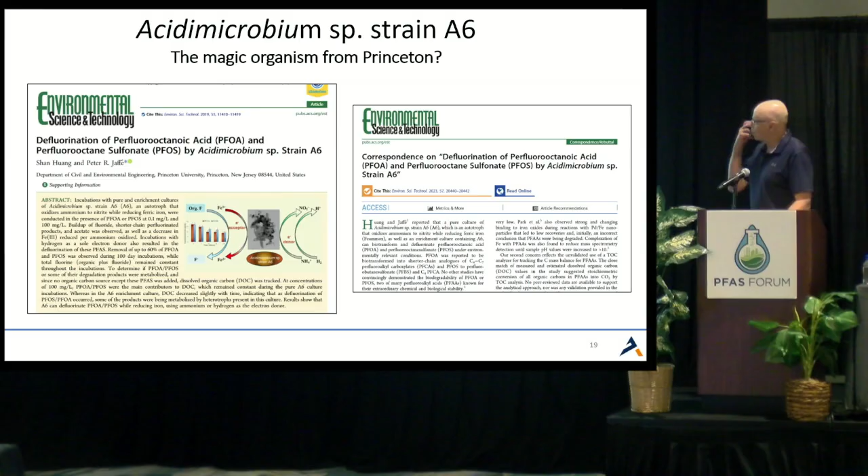What is this organism? It was not isolated with anything to do with PFAS. It was actually isolated from a swampy area, to study a process called Feammox. This organism oxidizes either ammonia or hydrogen, and it reduces ferrihydrite, an oxidized iron compound. That's what it does for a living.

Long before PFAS became an issue, my laboratory—which is right by Princeton, and I've known Peter for years—we took this organism in our lab, and we were looking at dibromoethane, EDB.

And it debrominated dibromoethane, and it does TCE as well. He started looking at it for PFAS just because PFAS became all the rage. He'd been using this organism for years.

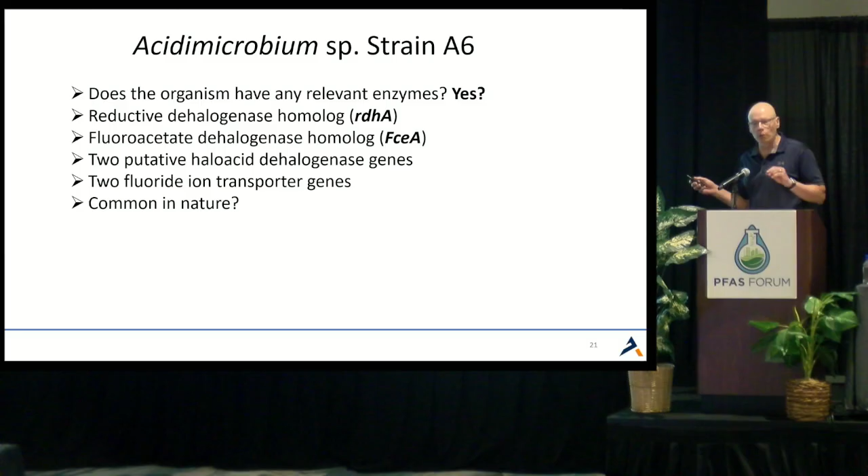Now, interestingly, does the organism have any enzymes that could do this? These days you can sequence a bacterium in a matter of hours and look at all the genes present. A gentleman at Minnesota named Larry Wackett has been working with this bug. It has some interesting dehalogenases, including a fluoroacetate dehalogenase, and a fluoride transporter. It has some interesting enzymes that potentially could be involved in defluorination reactions. So that's a check in the box.

Do you find it in nature? The fact is, once people start looking, you do find this organism in lots of different places. There's an Acidimicrobium very closely related to this one. I don't know if they've yet seen activity in another organism besides his species, but you do find it in different regions. So that's pretty interesting.

Here's some data, this is published now, from Peter's lab. Essentially what we're looking at on the bottom here is PFOA down to PFBA, so decreasing chain length, over an incubation from time 0 to day 100. We see declines in all of these compounds except PFPEA, which didn't seem to have any activity.

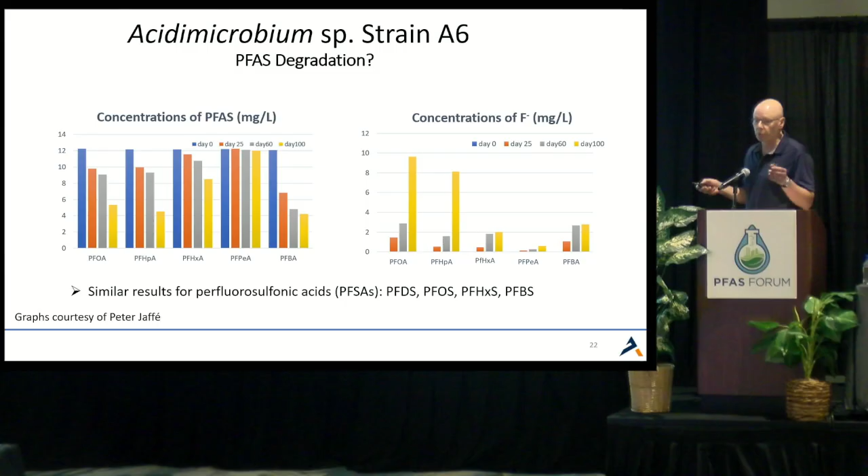On the positive side, we also see increases in fluoride for some of these compounds. Now, fluoride is fairly hard to measure, you have to be careful about how you're doing that. But that being said, we're seeing loss of compounds and increases in fluoride for some of them. So that's a good check in the box - at a minimum, we're starting to see fluoride produced.

Another study looked at daughter products. In this case, you're looking at PFOA declining over 60 days, and you're seeing production of an important compound - I don't know if I have a pointer, but anyway - you see this HPFOA. So what seems to happen initially is you're taking one of these fluorines off at that alpha carbon.

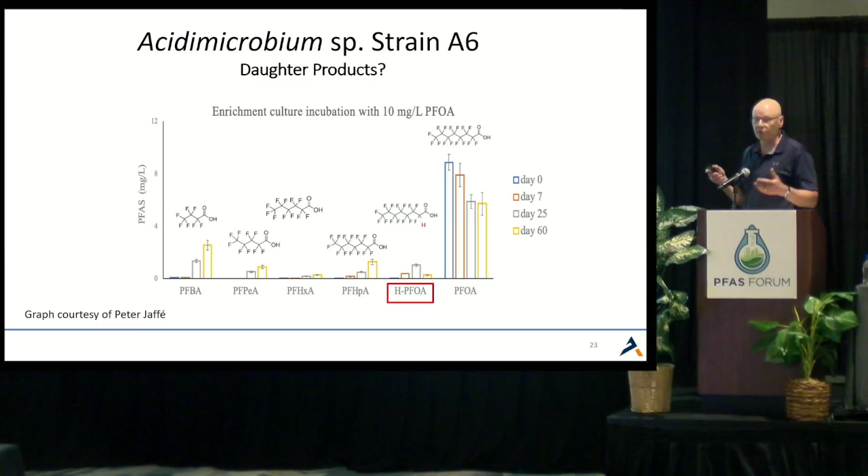The other interesting thing with these compounds is if you can get a fluorine or two off, they become much more biodegradable and much more reactable in different types of systems, because you've got this very stable structure with all the fluorines. If you start picking those off, these compounds can start to break down, and you see a bunch of shorter chain daughter products as well. There are some pathways proposed for how this can occur, and you see the same type of thing with some fungi for precursor type compounds.

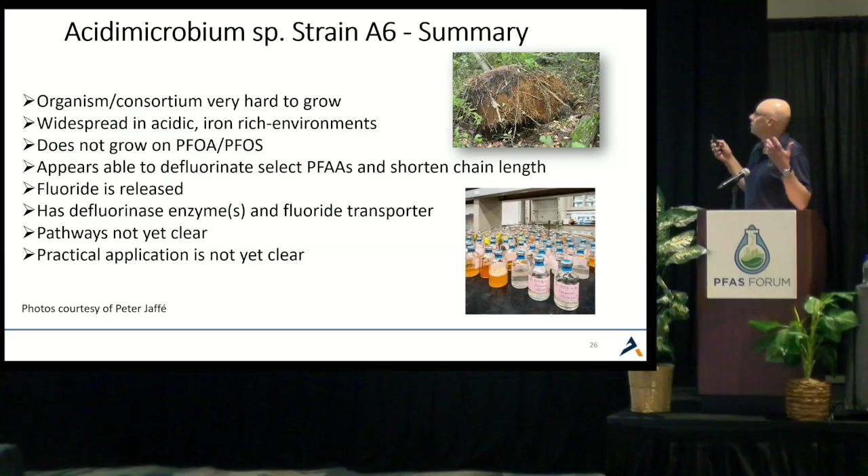So just in summary, it does seem to be widespread. It doesn't grow on these compounds, but it seems able to defluorinate some of them. Is it getting all the way through to just carbon? It seems to be going down to shorter chains, but it's not going all the way through, it doesn't appear. But it's a very interesting organism, and at least we have some initial precedent now for biodegradation of these compounds.

Other things people are looking at are peroxidases and laccases. These are fungal enzymes primarily, but we also produce some of these, and plants produce some of these types of enzymes too. Like the peroxidases, they tend to be extracellular, as do laccases. Fungi have to break down lignin, they have to break down trees, so again these stable structures are something people have looked at. This is a place where you're looking at in silico design of enzymes - can we design enzymes? We're in this new era that can break these things down.

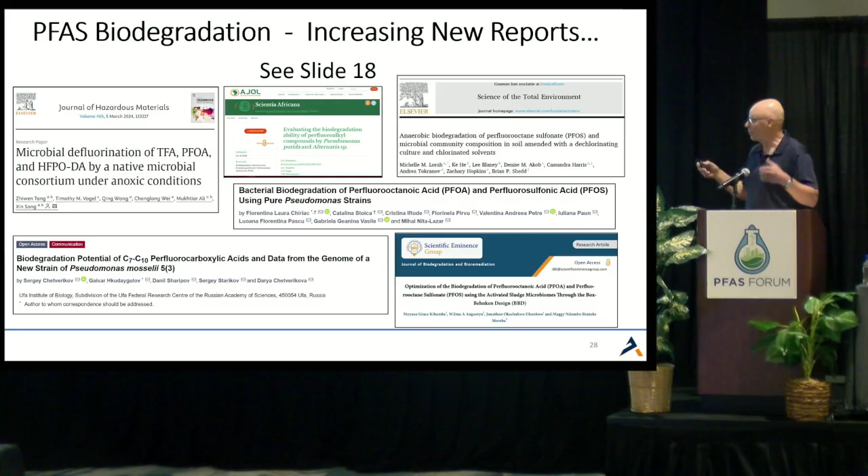Now, there's more and more papers coming out. I mentioned the Jaffe work because I've reviewed a lot of that. I start looking at new papers, and I want you to see slide 18 again. Go back, look at what they've looked at. Do they see daughter products? There's a lot of disappearance papers out there right now, but there's more and more in the literature, which is encouraging, but all of this stuff sort of needs to be followed up on.

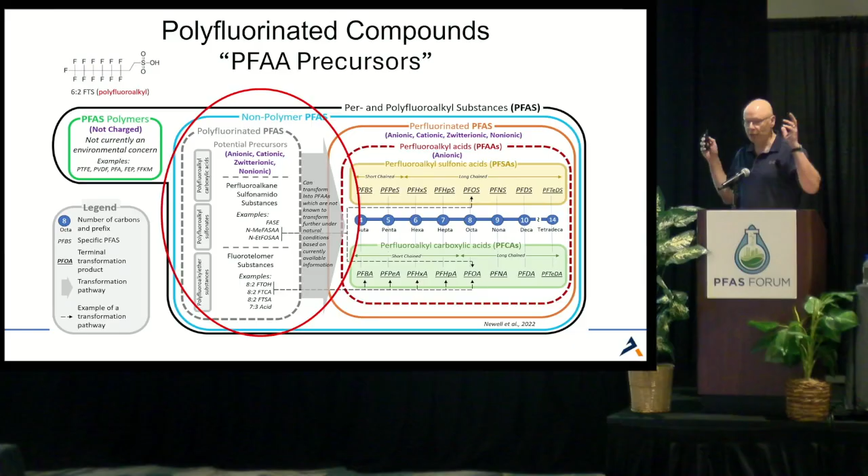Okay, now I'm just going to wrap up with precursors. This is a very different story. There's a lot of bacteria that biotransform, not completely degrade or mineralize, these precursor compounds. We've seen various talks over the last two days where people have looked at things like landfill leachate and other materials, or you've looked at oxidation reactions, and it's these precursors that are transforming, and that can be interesting, and it can also be a bit problematic.

So what happens is when you have these AFFF sites, you have a lot of precursors there. And as I think was mentioned yesterday, we can't detect them all individually. You use either a total organic fluorine method or a total oxidizable precursor method where you take a sample, you oxidize it to things we can detect, and you see what's there. But you have a lot of these precursors, and some of them have long end groups, and they tend to be bound up in the soil materials in an aquifer.

So one of the questions is, what kind of happens to these over time? And the ones that you guys would be looking at, that you see in like 1633, or things like 6:2 FTS, 8:2 FTS, we see a lot of those. Well, in fact, there's good precedent for bacteria that can actually biotransform these types of things.

And this is just an example, and this was also an example of organisms that can use some of these compounds. If you limit the environment in sulfur, there are bacteria that will—and this is repeated many times now—actually use the sulfonate group on the end of some of these compounds as a sulfur source, so they can cleave that off. And then there's a co-metabolic reaction.

This was one of the papers from our group in ES&T, and essentially we looked at organisms that grow on things like methane and propane, and in the environment they can take 6:2 FTS, they have some oxygenases, they put an oxygen on there, and there's a couple of different routes they go. The problem is what you're ending up with are shorter chain carboxylic acids. So you're going from something you know is there, or don't know is there, to things that you do know is there, and that's kind of the big problem—we're not getting all the way through.

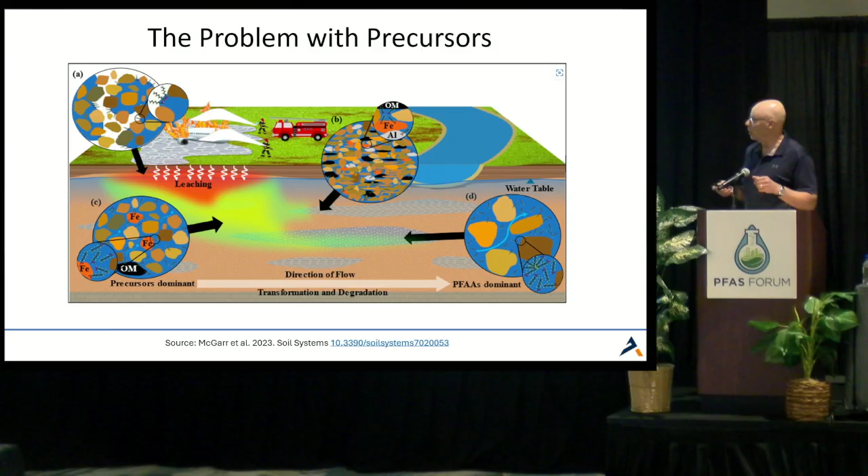And with that, just a quick summary to close out. So a lot of these precursors biotransform, but they transform to PFAAs. And there are some interesting organisms coming along, and enzymes. Wait and see—I don't think this is going to be the ultimate solution at most of these sites. I don't think we're going to find the Dehalococcoides, and that has to do with energy considerations and other things. But that being said, I'd love to be proven wrong here in 10 years, where most of this session is about bacteria that are degrading PFAS in the environment. So I guess we'll wait and see on that one. Thank you very much.

I'm glad you gave that talk instead of me. I don't think I could have made it through all of those names.

Next, we're going to move on to soil remediation of PFAS using rapid leaching technology. I got introduced to this yesterday, and this is one of the talks that I'm really excited to hear from. So let's bring up Bryan Massa and Shaun Malin of HRP Associates.

Good morning. Everybody okay? Still on the bus? All right, I got a thumbs up. I recognize that this talk is between you and your refill of coffee, break, snack, and all that stuff. So we're going to keep it high level, have a little bit of fun here. Bryan Massa is my colleague here, companion, travel partner, anger translator for me. So if you all get unruly, I heard this was a rough crowd, so I brought in a little bit of backup this week.

We're here to talk about soil remediation. This is my first time at the forum. I appreciate the group here, I understand the conferences have been awesome. I believe that we're the only soil remediation discussion this week, so I'm excited to bring this to you guys.

Before, with everybody kind of being burnt out, I know we've been at this for 2 days with some really high-level science. When you guys walk out that door in 20 or 30 minutes, this is what I want you to understand: rapid leaching technology is simply a massive volume reduction.

We have excavated piles of soil stockpiles at base up in Pensacola. I've heard from multiple of you, we all know that there's soil stockpiles up there with AFFF in it. We excavate the soils, whether it's from Milcon projects or restoration projects, so we take hundreds of thousands of cubic yards of dirt and put that into an RLT cell.

We'll show you how we construct it. We fully saturate that cell, we flood it, so we convert all this dirt into a smaller volume of water, a couple thousand gallons of water.

In discussions with a lot of you, I want to be very clear that we are water treatment solution agnostic, okay? I'll keep Bryan from having to translate for me. But in our particular research during our R&D, we did use foam fractionation. So this cartoon signifies that transformation from all that mass to a highly concentrated drum of foam fraction concentrate.

I'm going to do something really stupid here, and I'm going to shuffle my own slide deck willingly here. I'm going to show you how to construct, just real quick, how to do it. Bryan, unfortunately, has to listen to himself on video for 2 minutes here. Let me see if I can get this going with the button.

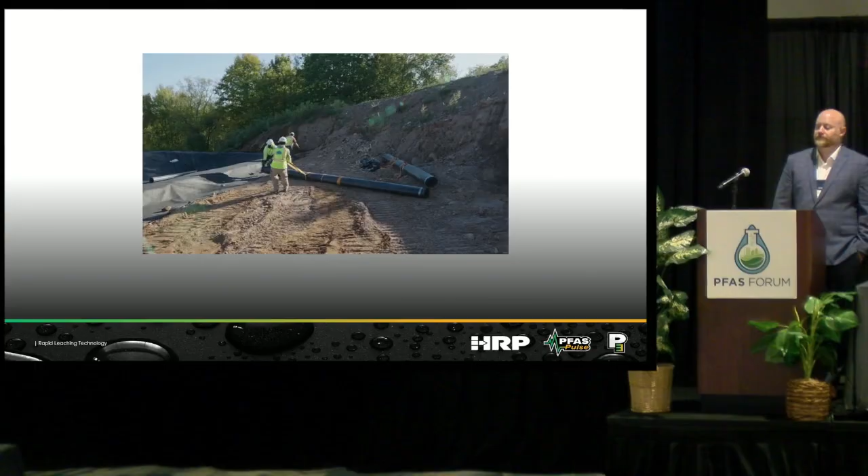So what we have going on here is they're actually starting to build a cell. We're going to use this one for dewatering purposes for sediment, and this can be an extremely cost-effective technology by allowing you to dewater rapidly without the use of additives and allowing processes to get shipped to landfill for disposal.

The technology uses multiple layers. First, it starts with site preparation. They build a bermed-in area out of soil. Depending on what you're looking at, this particular site has no concern with contaminants, so we're not using a GCL, which is a geosynthetic clay liner. Again, it's clean sediment, this is just for dewatering purposes.

So it has a filter fabric underneath it. That's the base, that protects the geomembrane, which is what you're looking at now, which is a plastic liner. The fabric basically keeps any sharp objects or anything that may be under there protected from the liner. Liner goes on top of it, it gets seamed in place, which is what the crew is doing now.

This 8-inch drainage line, perforated pipe, goes through the liner. What they're constructing now is called a boot, where they physically melt the liner to the HDPE pipe to make it a complete watertight bond. They'll continue building this aspect to it, and then install a drainage layer, a proprietary patented layer that we've developed to allow the rapid dewatering to occur.

That's going to be the next step, and then after that the product is ready to use and get loaded up with soil. The liquid in the soil rapidly dewaters out of this pipe, comes out the other side. This size drainage pipe allows for about 1,500 gallons a minute, so it can dewater quite quickly.

If the water was contaminated, you'd do treatment on the end of it. We would be collecting it into a secondary pond, and then that could go through a wastewater treatment plant process. Typical for PFAS, if PFAS was a contaminant of concern, we'd be doing foam fractionation, ion exchange resin, granular activated carbon, and then we'd be using the water to reintroduce it back into the cell and wash the contaminants out again.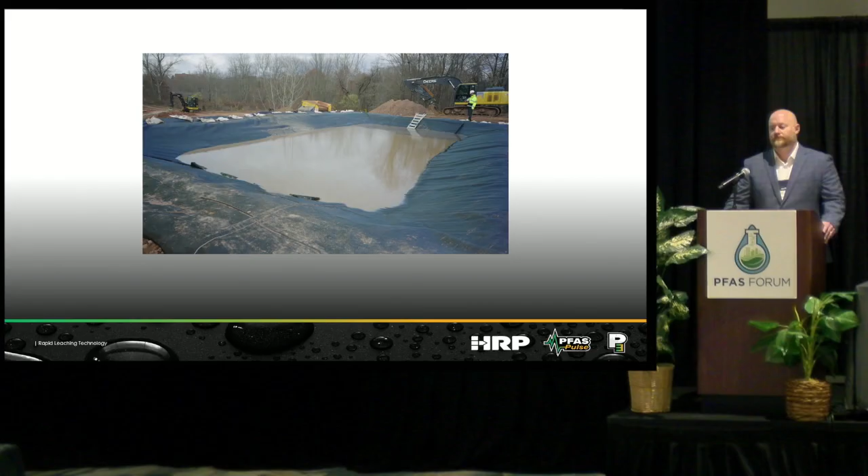So for PFAS soil, imagine that we've excavated soil, we've put it into the cell, and we've filled it with water.

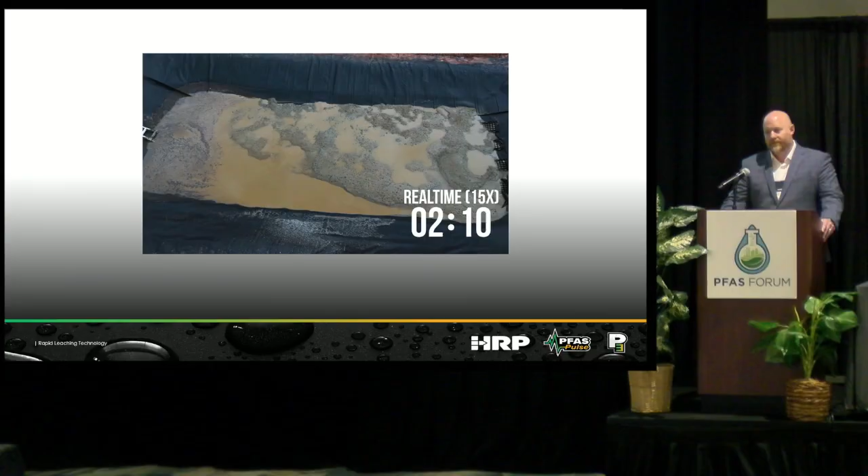I want to note, for most types of materials we get, after 24 hours we have the material down to an 8% moisture content, which for most DOTs is the green flag to load up and hit the road.

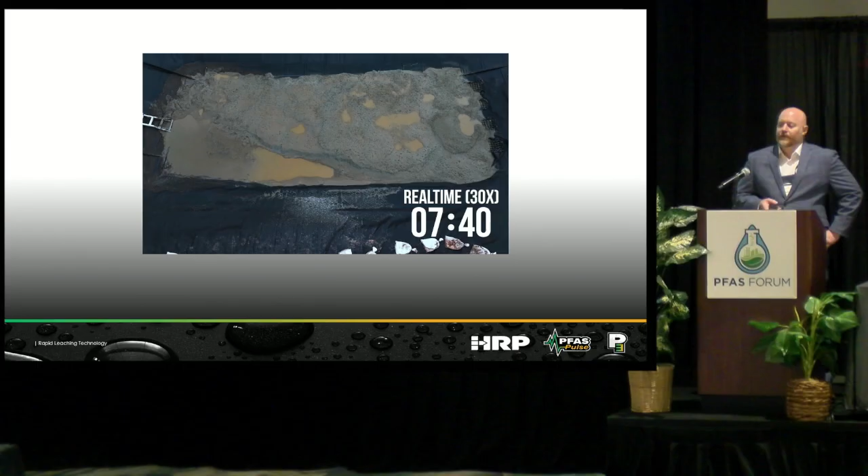I just want to reemphasize, if you didn't catch it, this particular cell was built for a dredging scenario for a client in the Northeast. So there are some patented components that I'm going to talk about here momentarily that were not part of that construction, so you didn't see it, but you'll see it in the field demos here.

In essence, now I know why everybody's looking at this TV, because we all need glasses and we can't see that far, can we?

In essence, that cell that you saw constructed there is watertight. I want you to picture a two-drawer dresser, if you will. In the top box is where we're loading the soils that are impacted into the cell. We're going to fill that cell up with water, fully saturate that cell.

And then we have all of the tiramisu of the geotextile liners, the things that you saw in the video that were getting constructed there. We have an air component to it, which I'll show you on the field demo, that agitates and creates the partitioning that allows the PFAS to go into their natural state, if you will, wanting to be on that air-water interface. And the agitation moves the dirt around, which is kind of the upsell on a traditional soil washing method.

I would explain that most soils, most types of soils, are dry, air quotes, in 24 hours. In that second bottom drawer of the dresser is where we collect the leachate, and we pump that off into a water treatment trailer that we have for field demonstrations.

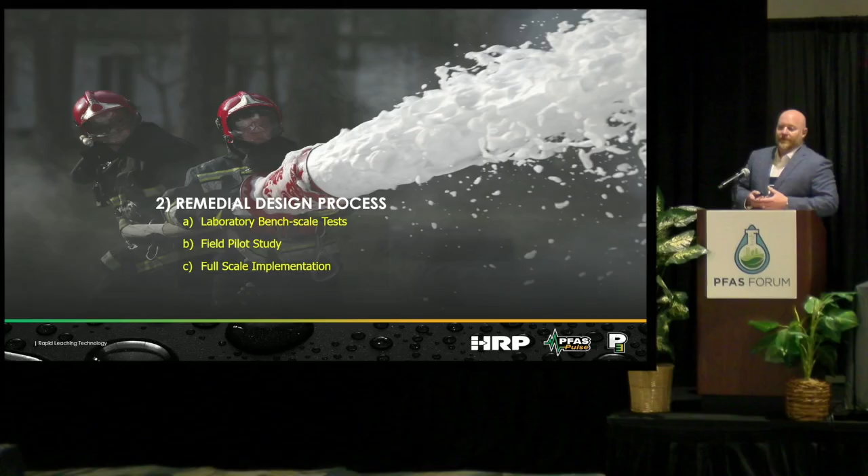I have here a collection of different laboratory bench scale tests. This first one, I know it's probably hard to see in the back, but this was early on in our R&D. We had an airport client that had their hands on some military spec AFFF, so we created our own sample. The starting concentration for that sample was 5.5 ppm, so pretty hot. It was a 50-50 mix of ChemGuard and Ansulite foam.

There's a variety here on the x-axis. We were tinkering with pH early on in the R&D. What we found with this particular soil material is that a neutral pH of 7 with 3 rinses got us 94% removal, and that was the proof of concept we were looking for at this point in our R&D process.

A second standard, we employed a laboratory to create a 1633, as in EPA method 1633, standard. That entry-level concentration was at 175 ppb, so significantly less than the AFFF proof of concept. Again, with a pH of 7, we got about 90% removal on that as well.

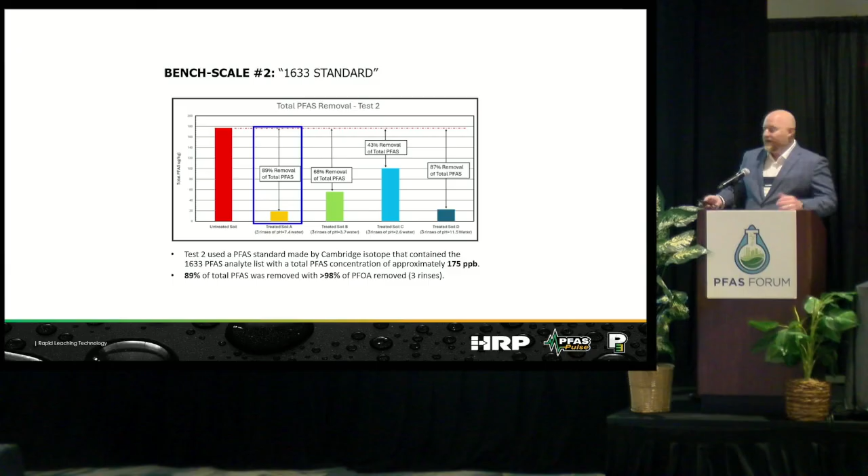So we have: can you do it with high concentrations? Can you do it with low concentrations? We're answering those questions here.

We recently were given the opportunity to go to an Eastern North Carolina base that you've all seen in their commercials, their PR at night, if you've fallen asleep on the couch. We were given access to come collect some soil samples from one of their source areas and do an in-the-field DOD test. It was a firefighting training exercise site.

Again, we went through that first phase of R&D and came out and grabbed some samples there. You can see that again, we had 89% reduction on the 1633 list, running TOP analysis and running 1633 to try to understand what precursors we had in those materials. After one rinse, we had 67% reduction on that one.

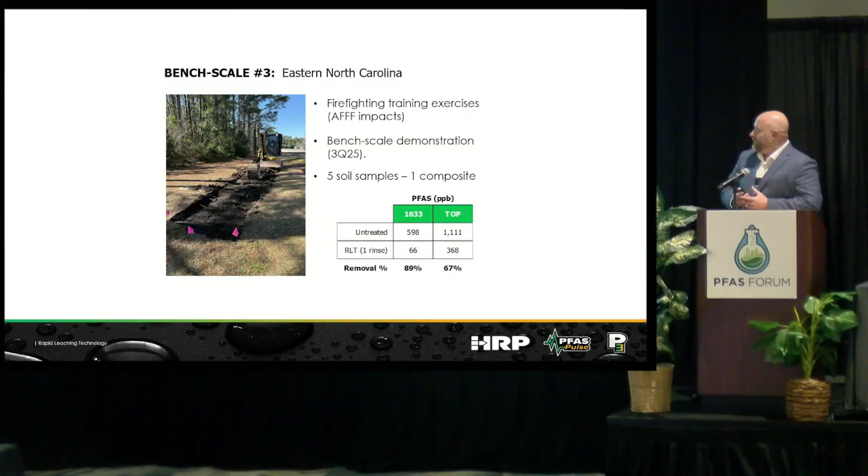So then moving out of the laboratory bench phase, figuring out the pH of the water that we may want to use, understanding the concentrations, understanding the material that we're working with here. We then go to the field and we have these mobile demonstration units, which are basically mini-size 1 cubic yard boxes that have the same geosynthetic liner system in there.

You can see in this particular box, again, for moving from a dredging scenario to an environmental remediation scenario, the air component that we've added into the bottom of the box. I want to emphasize that that air is part of the secret sauce that agitates the soil in there, not unlike a foam fractionation system.

You see a lot of controls. We have a pump skimmer here. Compressed air goes into there. It's a watertight design, and of course there's an effluent drain line here.

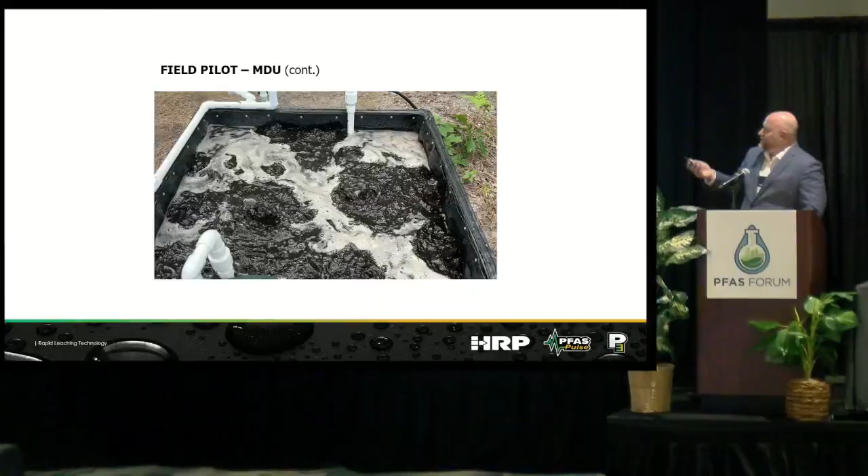I got a quick video here to show you what it looks like. There is soil in there. I know the water looks kind of black in this particular video, but this is soil in the box with the aeration component. You can see the foam - we're refoaming the foam, so we're rinsing the soil grains. There's agitation going on in there, and we're creating a micro-bubble, and we're skimming that off on a surface pump, which is kind of at the bottom of the screen there, that green piece of equipment.

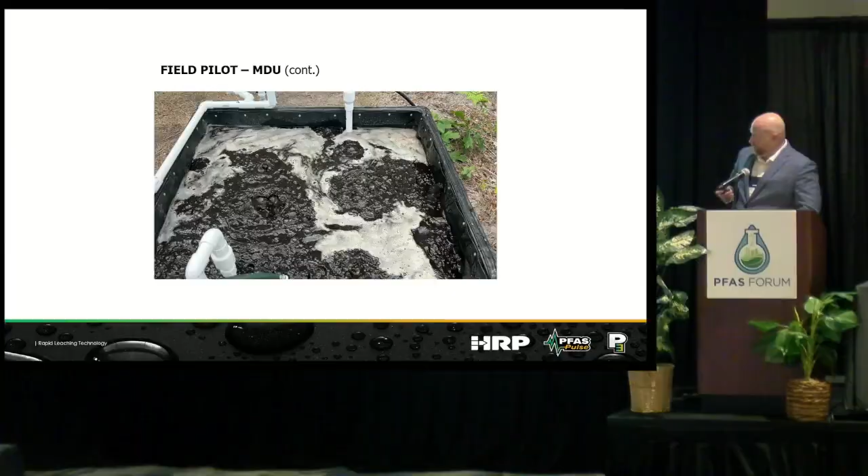So we run that for a couple of minutes. This again is the draining component of it. So we determine how many rinses we need to do to get to the desired concentration. Our limitation on the effluent is limited to the size of the bung on the outside. So as you saw that huge pipe on that first video there, we're not joking about the rapid dewatering.

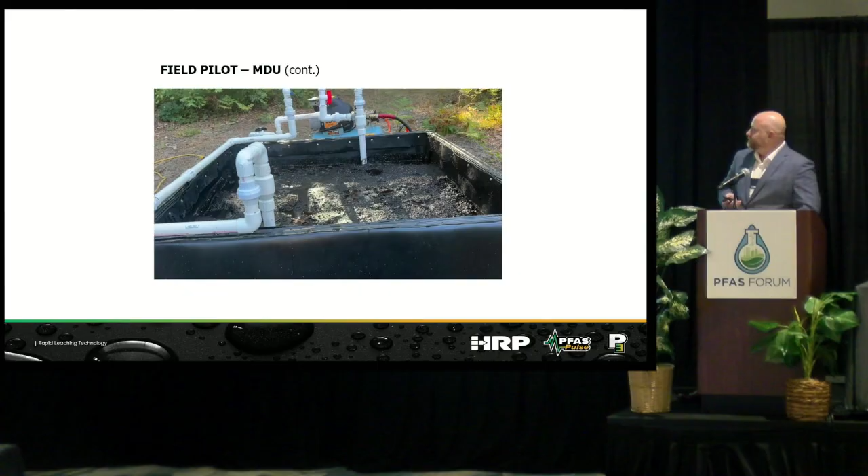This is what our Eastern North Carolina pilot looked like. We had lots of fines, so that was a challenge to kind of design that in the field. On your first rinse here, it's probably a little bit hard to see, but we had our general Guinness consistency on the first rinse. We had lots of foam in there. We had very high concentrations that we were dealing with there.

I think we went through 6 rinses for the purpose of this demo, given the concentrations and the data that we received through the lab bench scale testing. You can see that it's really not foamy on the last rinse there. So at the end, moving from the lab phase to the field phase, especially on the DoD installation, once again we removed 96% through rapid leaching technology.

So what you have here is whether we're dealing with AFFF concentrate with the mil-spec sample that we created, or low-level soil concentrations that you might find downgradient of a source area, or maybe IDW that you're collecting through RI investigations and so forth, to an actual source area there.

We're pretty much in the neighborhood above 90% PFAS removal using this technology. Now again, to be clear, all of these tests were proof of concept. We wanted to show people that this technology worked. There are a variety of different ways.

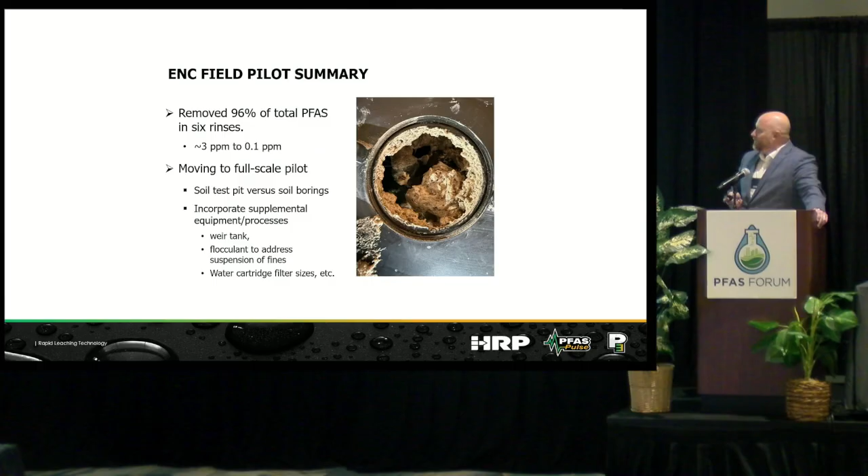And so at the end of the day, wrapping up a little early here for Q&A, the difference between the standard soil washing that I think most of you have seen on DoD through research grants is, again, that air component and that agitation and the full saturation that we get in our cell. So again, we're not standing at the top and watering material down like watering your yard. We're literally filling that cell, and then we're agitating that material, so we're getting 360-degree saturation around those material particles to ensure the PFAS leave that grain.

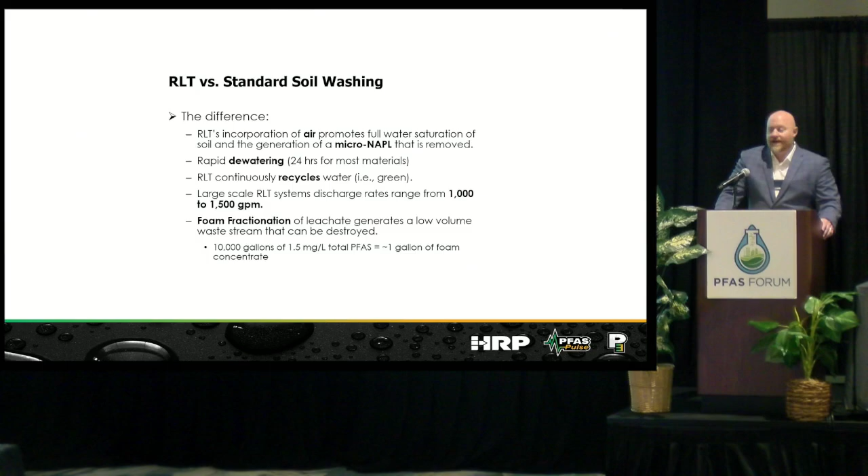Obviously, the cost analysis for this technology is dependent upon a variety of different criteria: how close you are to the certain landfill, whether you live in a state where Subtitle D with leachate systems is acceptable, and all that stuff's in flux. I've heard, we've all been talking about it this week, right? So as we continue to evolve, we like where we're sitting here. We're having lots of discussions with DoD. We've given lots of quotes to private side clients. I don't know what you guys are experiencing, but a lot of our private side clients are kind of in a hold pattern, waiting to see how things shake out. Obviously, as regulations evolve and things come out in the news, stops, all those kinds of good things.

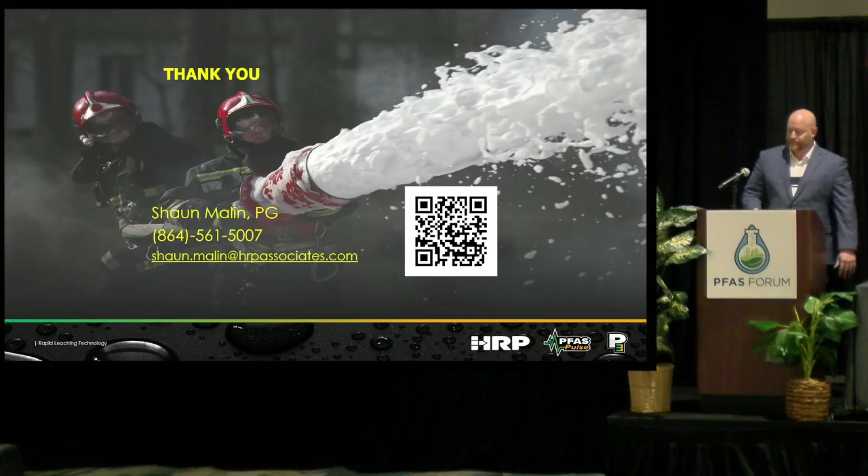Technologies like this are going to come even more into play as CERCLA shakes out. Remember that under the CERCLA ruling, PFOS and PFOA containing materials will be listed as materials for hazardous transport. Nobody knows what that's going to look like yet. We haven't fully seen those regulations yet, but it will significantly impact the cost of transporting impacted materials.

So with that, why don't we open the floor up for questions?

For the last speaker, you mentioned soil. Has this been tried on biosolids? Yes, it's coming. The question was biosolids? Yes, we have many clients that we've talked to about biosolids. It's something that we're looking into. We believe that with a couple of tweaks that we can handle biosolids, but we're working through the opportunity, the funding, and we have some good ideas on how we would deploy that.